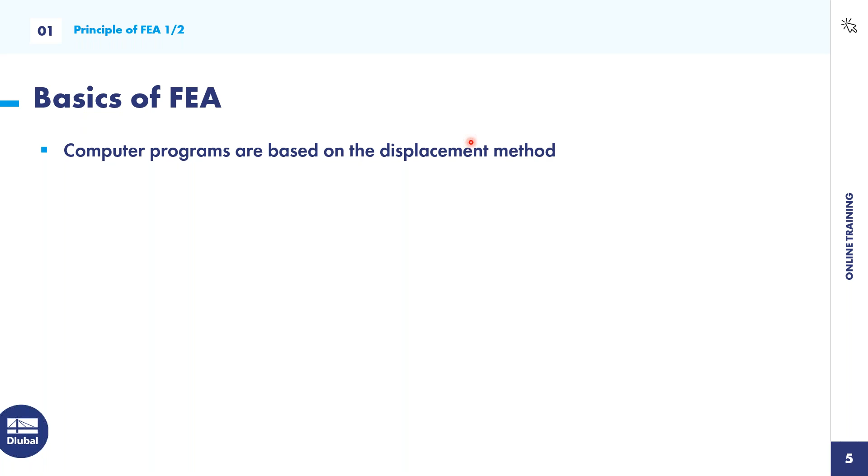Here, the FEA programs work with the displacement method. So the unknown of this equation, of this whole calculation process, is the displacement. You calculate first the displacement vectors, and then you can calculate the internal forces and also the support reactions and so on. This analytical solution of very complex structures is, in reality, really hard to achieve. So when you want to calculate something by hand or with Excel, you reach the limits, because it's very hard to get realistic results.

So you have to use FEA programs, FEA software. What happens there? The real structures are decomposed into a mesh of finite interconnected elements. That's also where the name finite element analysis comes from. The real structure is decomposed into a mesh of finite interconnected elements. We will see this later in the example.

On each node of this FE element, the properties of the element continuum are described. Then the mechanical behavior is described by approximation sets. These approximation sets are the secrets of every software producer, every software creator—it's very complex. And one really important point is the discretization of each structure.

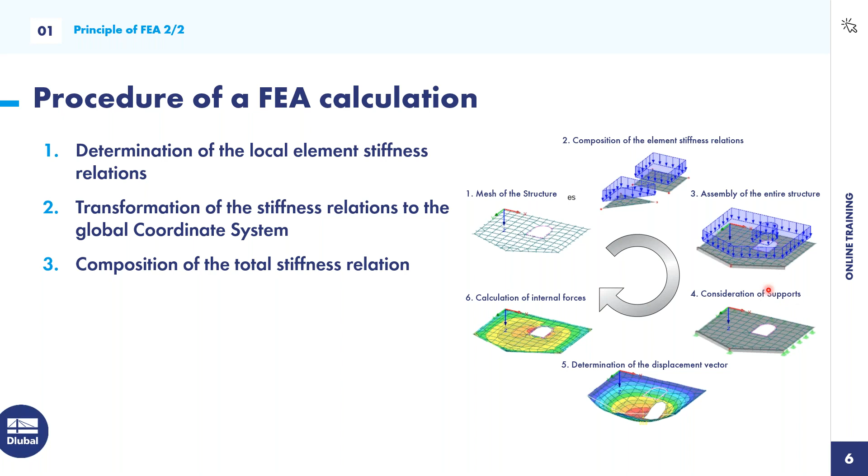Then I also have to consider some boundary conditions like hinges, or in this case the supports. Do I have hinged supports, or fixed supports? Do I have rigid supports, and so on? Then I can determine the displacement vectors, so I solve the equation system, and then I have the possibility to calculate backwards to the internal forces and also to the support forces.

Yeah, and this was the basic procedure of an FEA calculation. And now we are going to do this little example.

So first of all, we are going to model these 3 continuous plates. And then we are going to compare the results of this bending moment with a continuous beam. This will be very interesting, because then we can see the different results.

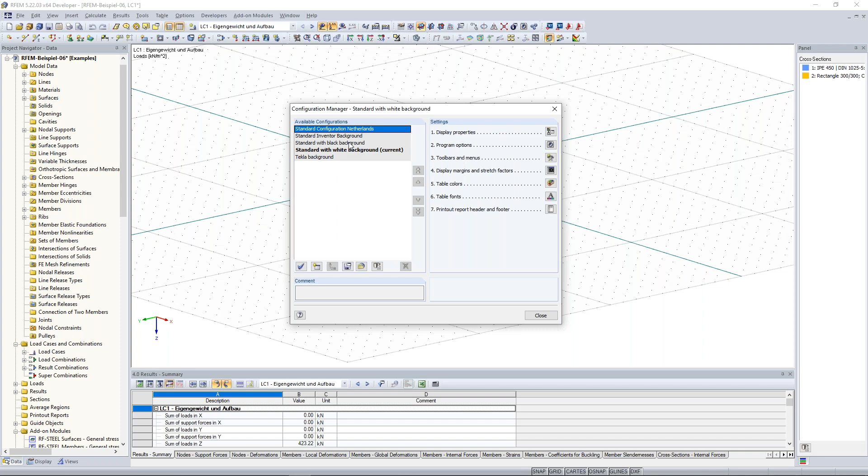So for those wondering why my background is white, here you can change it when you click on options and then the configuration manager. There you can see there is standard with white background, you can change it to the black background. When I click here, standard with black background, double click, and the background changes to black, but I prefer the white background. Double click again, and I have a white background.

It's up to you how to use it. I prefer the white background, but it doesn't matter. They also give you several other options to do something, and also some edit possibilities and so on.

Below this menu bar, you see the symbol bar. With the symbol bar, you have faster and quicker access to the most common used functions. So if you want to create some lines, just click on new line and draw your lines. This is very fast forward, and by double right-clicking, I finish and end this insert.

The same applies with a lot of other functions. So when I want to change my view, I can click here on isometric view and change this view. Also these views: when I want to look against the global Y coordinate, I click here, view in Y coordinate, and I look to this side.

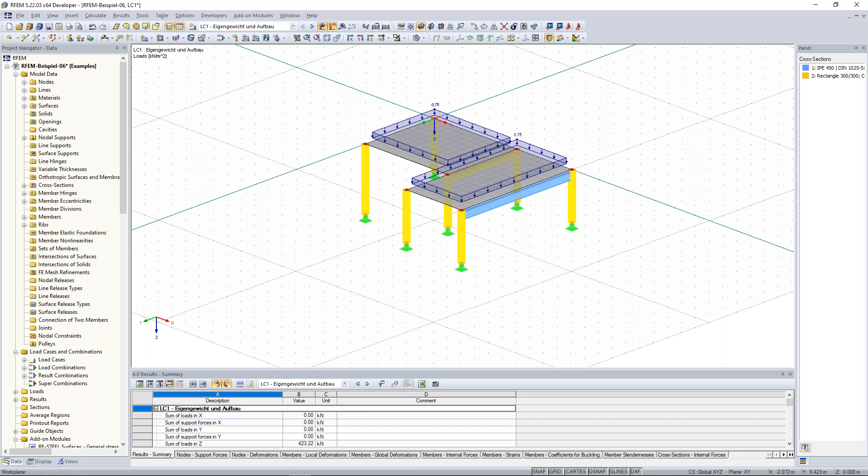When I show the results of this structure, I also have the fourth tab, the results tab. But I want to begin with the data navigator.

With the data navigator, you have all the possibilities to have an overview of data like the nodes. So when I click on one node, the node is selected, and with right click on that, I can find this node - I see this here with the arrow. The same with the surfaces: all surfaces I created before, I can click on them and modify or edit them just by right clicking here.

Also the same with load cases and loads, results, and so on.

At the bottom you will find the add-on modules. Remember, RFEM is good for the calculation of internal forces, deformation, stresses, and so on. But if you want to design something, like a steel column or a concrete downstand beam, you have to use our add-on modules. They will give you the designs for different materials and areas like steel, concrete, timber structures, while RFEM is just for the calculation of deformation and stresses.

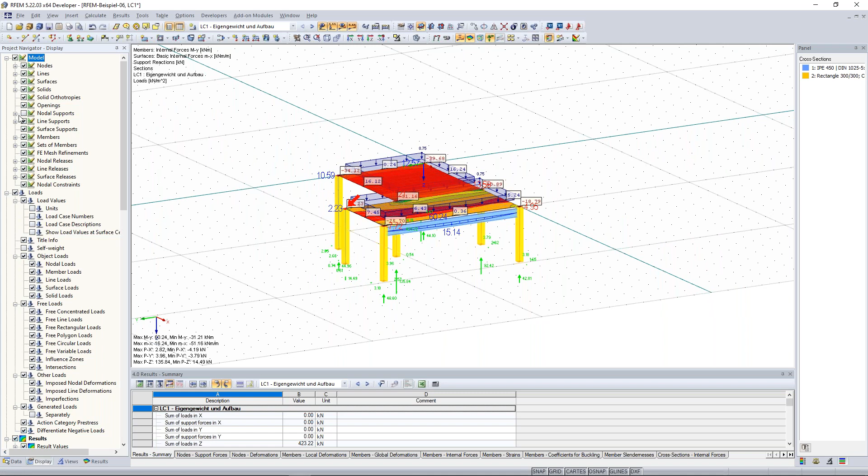The same with the loads: when I don't want to see these surface loads here, I just click on loads and deactivate their view. There are also a lot of other possibilities. Maybe when you want to show the numbering of all objects, just click here in the display navigator, go to the numbering area, and you see the numbering of the objects.

Then I jump to the Views navigator. It's very helpful to work with a lot of views when your model is going to be bigger and more complex. So it may be useful to have some user-defined views. I close and deactivate the result view, and I like this view very much, so I save this view.

I can click here: create new user-defined view. I write 'favorite view'. During my working process, I change some views in order to work better with the program and the model. Then when I want to switch to my favorite view, I just click here in the Views navigator under user-defined views, and you jump to your favorite view.

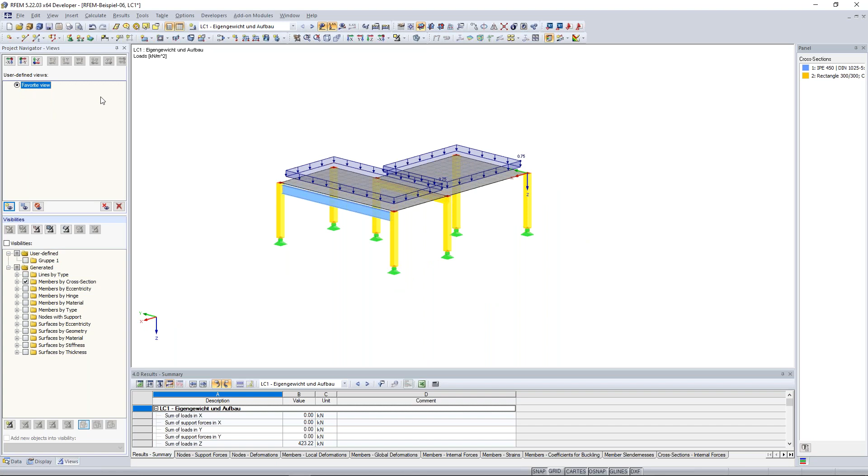The same applies with visibilities. When you want to filter something, to show just the members or the columns, it's very easy to do here with the views. Now I want to show just the columns. I click on members by cross sections, and since I know the cross section of my columns is 300 by 300, I click on the rectangle 300x300, and all columns are shown.

When I want to add maybe this downstand beam, this IPE profile, I click on that. And the same with the surfaces, so I click here, surfaces by thickness. I have two surfaces with a thickness of 20 centimeters. I click on that, and it shows me the surfaces.

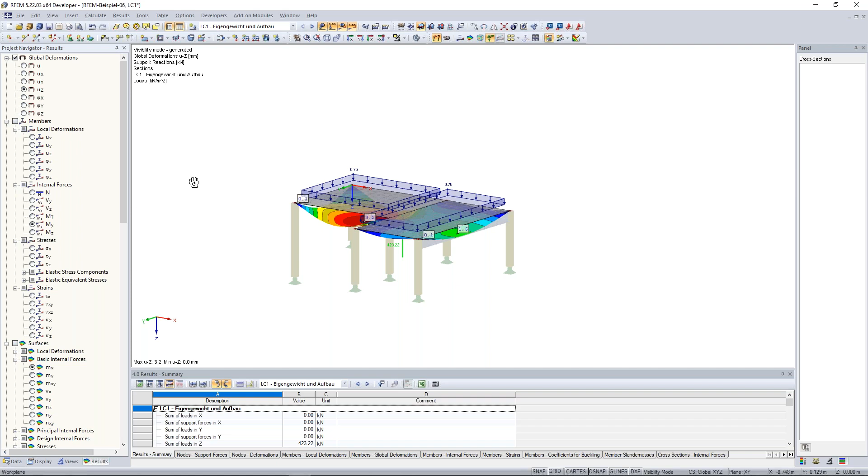Now to the fourth and last tab of the navigator, here I can show the results. First of all, maybe the deformation. I can show the deformation under global deformation, but also some internal forces. So when I cancel the visibility mode that I did before, I can show maybe the bending moment.

I just click here on My, and I see here at the downstand beam we have a nice field moment. Or when I want to see the compression forces with the normal forces at the columns, I see some normal forces and so on. Also the support reactions. Everything concerning showing the results, you can manage here by the results navigator.

Something to the tables: tables act in a similar way to the data navigator. So when you want to create something new, you can do it here just by creating a new node. The same for the lines, surfaces. So you see everything interacts with each other.

You can create a new node here in the table, or create a new node here at the data navigator by right-clicking on node, new node, or just by clicking here in the symbol bar. So there are several ways to do an insert, an edit, or a modification of a model here in RFEM.

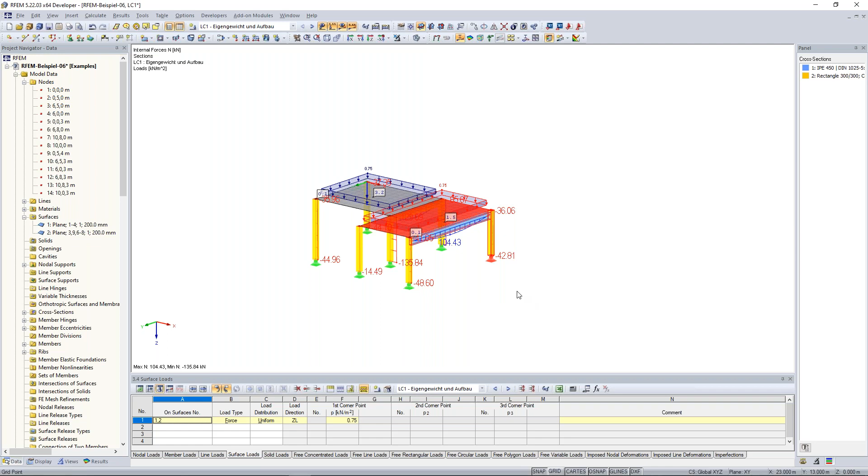Note the difference. With the mouse wheel, you can zoom in and zoom out. This is very important to know. When I press the mouse wheel, I can move my work plane. This is also important to know.

With the right click, I can open this context menu. Just clicking here on the work plane opens this context menu. When I do this on an object, it opens the context menu of that object, in this case the member or the line.

Also, when I want to rotate maybe this building, just press the Control key on your keyboard and then press the mouse wheel, and you can rotate it. The same functions you can do also here in the symbol bar with this icon: move, zoom, and rotate. You have the same possibilities and so on.

Good, so far to that. Now I have prepared some questions for you. Let's start with this one: I want to know from you what is a discretization. We had it before in the PowerPoint presentation.

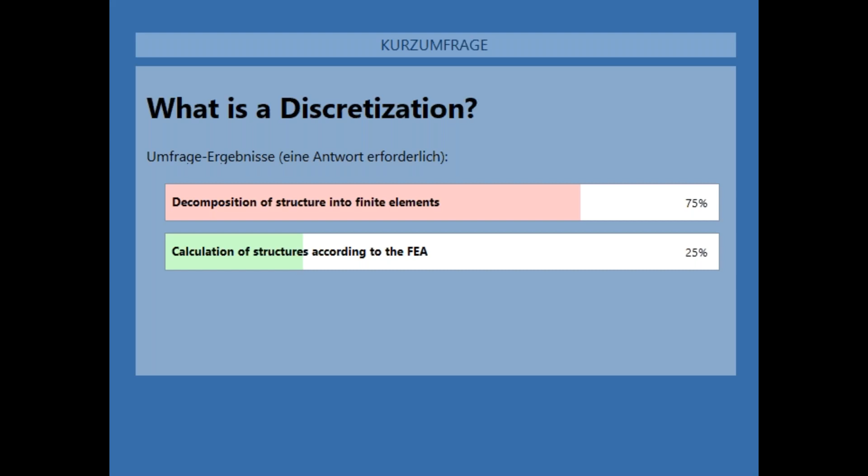Good, and the next question is concerning RFEM. I want to know what is RFEM, what can it do.

I have to take a sip of water.

Good, 90% have voted, so I close this poll window here. I show you the results. RFEM is a 3D FEA program for calculating members, plates, walls, folded plates, shells, solids, and also contact elements. So everything is there. But it's also a 3D structural frame analysis program.

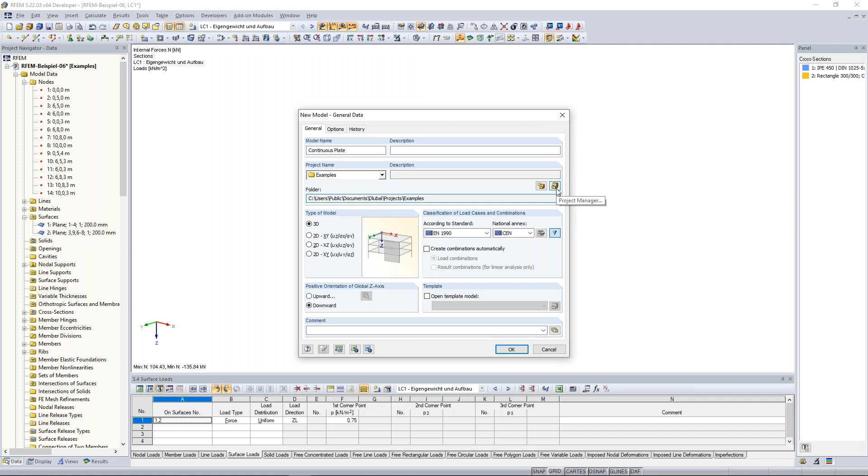After that, it opens this General Data window, and here you can insert the model name. In this case, I give the name Continuous Plate. You can make a short description, it's up to you. I save this to my folder examples. You can create a new folder, a new project, or search for the right folder here at the project manager, it's up to you.

For me it's very important to differentiate this type of models. Here you have the possibility to have different types of models - you can create a 3D model, 2D, and different types of 2D. This 2D type is especially for plates loaded by forces perpendicular to that plane. And this other 2D type is especially for walls or for 2D frames who have parallel loads - these are plates acted on by wind loads, for example, and these wind loads act parallel to the plane.

For our example, it's important to choose this 2D XY, the first one, and we don't need any of these load cases, no classification of load cases in combination, so we don't need any standard. Maybe for real structural engineering work we'd have to choose some standards, but in this case it's not so important. But I want my positive orientation of the global z-axis to be downwards. For structural analysis, it's very common that the global z-axis is downwards because our loads show downwards, and this is also the reason why we have this z-axis downwards.

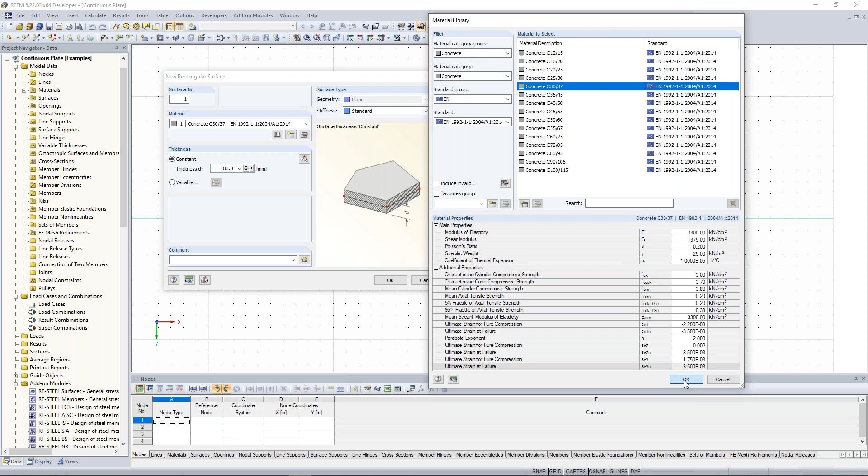The C30/37 concrete has a characteristic cylinder compressive strength of 3 kilonewton per square centimeter, and also a cube compressive strength of 3.7 kilonewton per square centimeter. So that's what this C30/37 means. For those who are not from Europe, just click on OK, and I press again on OK and put there a thickness of 300 millimeters, then I press OK.

Then I click here on this first node, on the global axis point, and then I put this plate 10 meters long. You see it here at the coordinates - now my x coordinate is 10 meters and my y coordinate is -5. I click on that, and by right clicking I end this option to insert something.

Good, now let's see - I see there is one question concerning the units.

Here at the menu tab of options, you have the possibility to change the units and decimal places. This is very interesting for those who are not using Euro units, or who are using imperial units. Just click on units and decimal places, and here you have the possibility to change that. You can change from meter to feet, yards, inches, and so on, and adjust the decimal places, same for loads, results, and so on. But I leave it like that because for me it's clear. For those who want to change the units, just go to options, units and decimal places, and change it like you want.

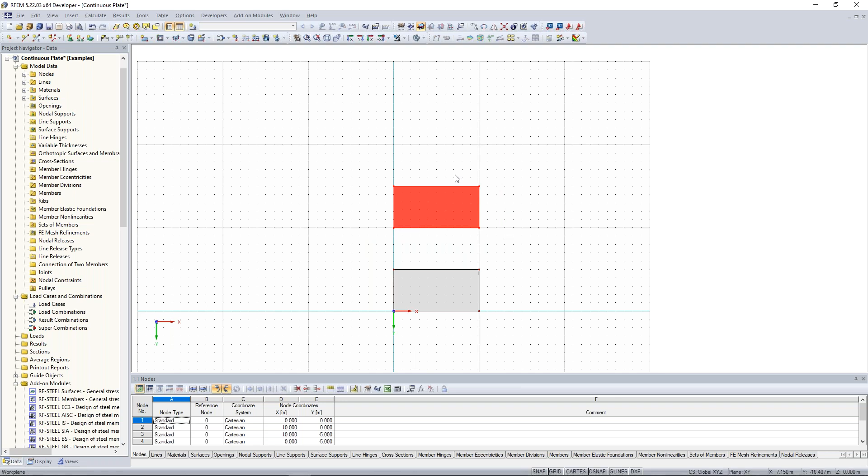Now I want to copy this plate from there to there. So I do a selection window and select the whole plate, including the nodes and the lines. Now the whole surface is selected. By right-clicking, I open the context menu of these objects, because there are now more than one - I have selected the surface, but also the 4 lines and the 4 nodes. I want to copy everything, so I click here on move and copy.

To copy and move this plate, I have to enter at least 1 as the number of copies here. Then I choose the displacement vector, and the displacement vector for me is minus 10 meters, so the displacement is then from there to there. I click on OK, and the whole plate was copied from there to there.

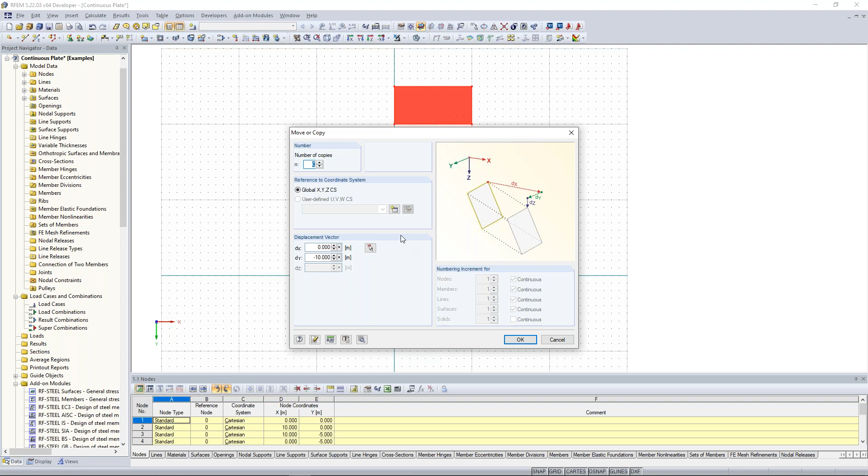Now I want to move this 10 meters downwards. So I select everything again, then right click with move and copy. Now I don't want to create a number of copies, so I set it here to 0. I select my displacement vector, which should be from there to there. I click on OK, and I copied it from there to there.

To have a good comparison to our plate results, I want to create also a beam, a continuous beam. In this case, I have to create a new single member - to create beams, downstand beams, or girders in RFEM, it's always this new single member. So just click on that, and click here to create a new cross section.

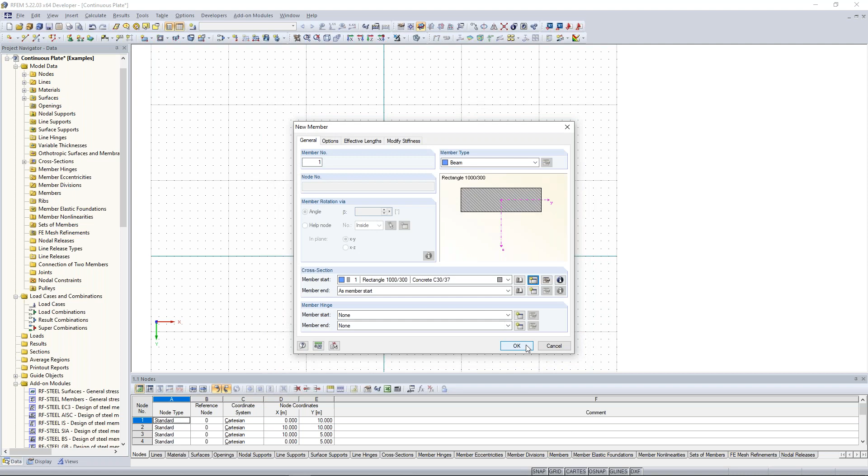I create a new cross section for member start. In order to have a good reference to the plate results, I want to create a rectangular solid cross section. So I click here on the overview of cross sections, to the solid cross section rectangle, and I type my values of a width of 1000 millimeters and a height of 300 millimeters. The material is the same here. I click OK, apply this again with OK, and confirm this also again with OK.

Then I model this continuous beam from that node here to that grid point, and close this insert also with escape or with a right click on the mouse.

Next step is that we divide these lines in order to have lines to create line supports here. I change my view a little bit - we want to create a continuous beam here, so we need an additional node to create our support here, and also additional lines to create our line supports. So I change my view again to the front view, clicking on view in Z direction, looking at this side to have this view. So what can I do? I can divide lines in order to have an additional node.

So I click on the bottom line of this plate, of this surface, right click on that, and then I can divide the line graphically by n intermediate nodes or by distance. In this case it doesn't matter what to use, everything is possible, but I want to show you the different options. So first of all, we do it graphically. In this window you have the division spacing and also the steps for how you divide this. As you go along the line, you see the different numbers, and I want to divide this exactly at the middle of the line, so I need the number 5. I divide this, and now I have an additional node.

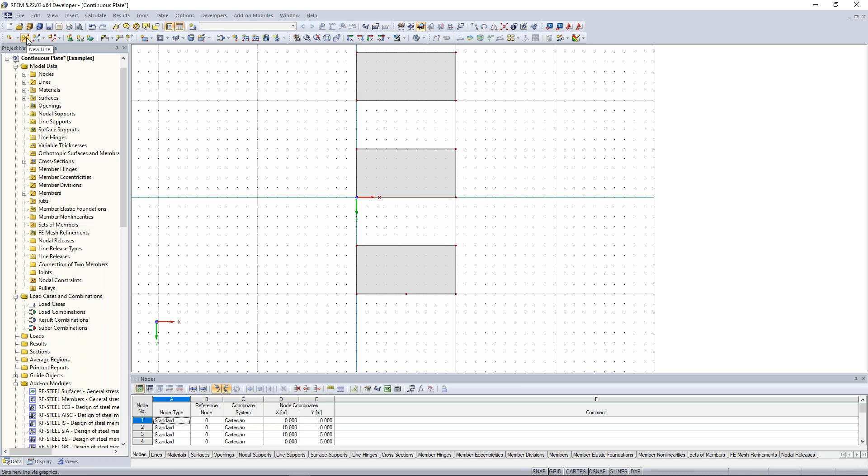And now click here from this node to this node. Good. By double escape clicking or double right clicking, I close this entry.

We do the same again with this line. So right click on that line. I divide the line, but in this case in intermediate nodes.

Now it's very important to know these arrows. These arrows symbolize the orientation of the line. So every line, every member has one node at the beginning and one node at the end, and this arrow shows me the orientation. In this case, this arrow shows from the left side to the right side, meaning the line has at the left side its beginning node, its starting node, and on the right side its ending node.

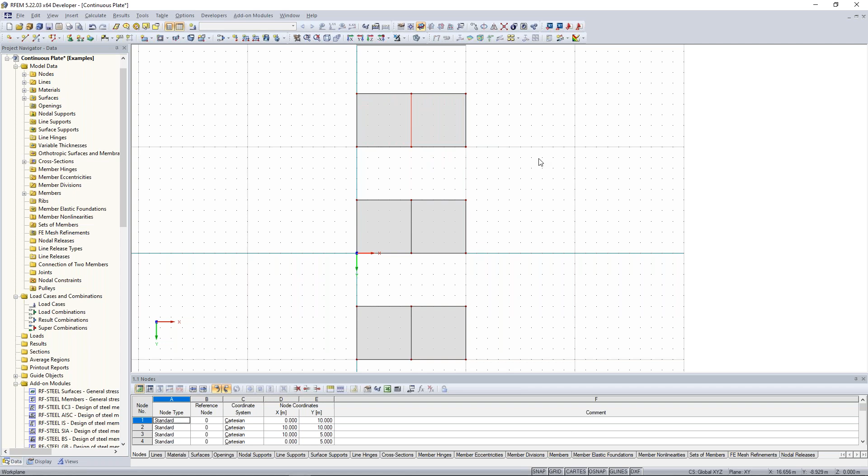Just click on one of these lines, and now with the pressed Ctrl key and the pressed left mouse click, you can easily drag and drop something. And when you want to leave it, just release the left mouse click. So again, let me undo this.

With the keyboard combination, Control key and Z, I can undo some things, and I want to do this drag and drop function again. So left click on this line, then press the Control key and also the left mouse click, and release it here. This is a very important workflow and function of RFEM.

Good. Now we want to divide this beam also. So I click here on this beam, right click on divide member. Keep it in mind, a member is also a beam or a column or something like that.

Now I want to divide it by distance. Now I have again this orientation of this beam, the same as before. On the left side, I have the beginning node, and on the right side, I have the ending node, because my arrow shows from left to right. And I want to have the division here at 5 meters. I click OK, and that was it.

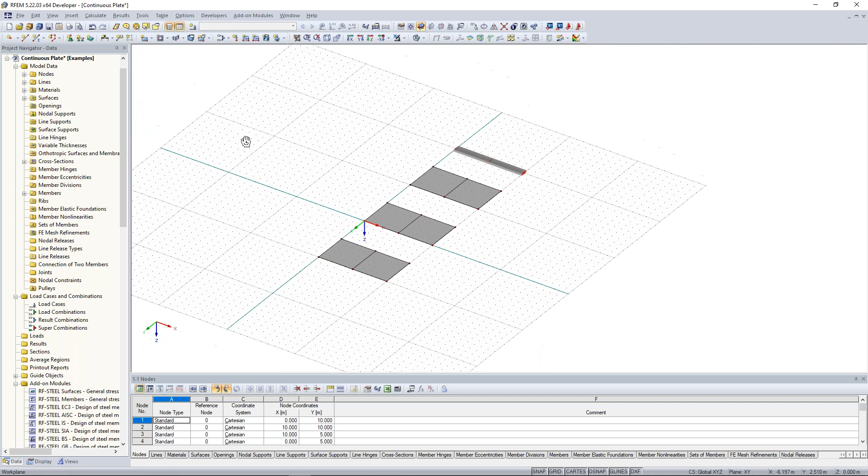Good. Now I want to create the nodal supports and the line supports. First of all, the line supports, because we want to have here a continuous plate of these surfaces. So we need new line supports.

Just click here in the symbol bar, new line support, and we choose this hinged support, because when we are going to watch these supports, we can create a new type of line support here.

We see, okay, the UZ, so the support in UZ is activated. What does it mean? So when I activate some of these things here, restraints and supports, I block the deformation, I block the displacement or the restraints. So I want my support to carry vertical forces, so I have to block the displacement in the Z direction, and this is also the reason why there are going to be vertical forces. I press OK.

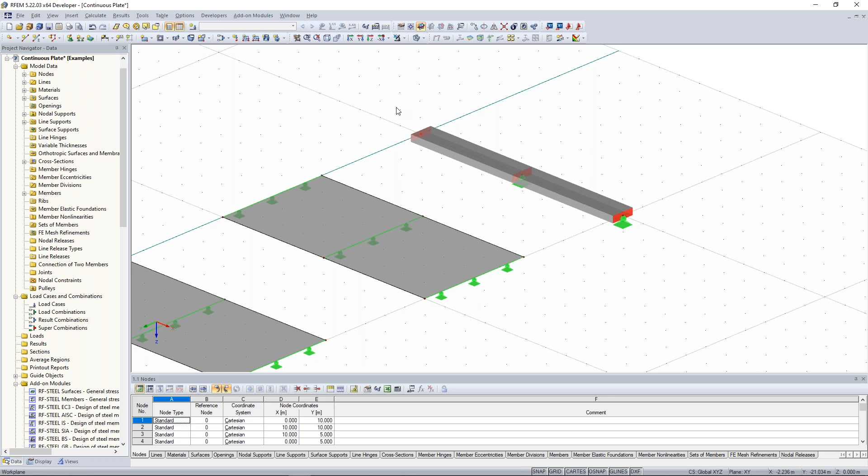And for that point, for that node, we need a different nodal support, because at the moment it can be possible that the beam has torsion, and that it can rotate along its own axis, and this is something we don't want to have. So I have to create a different nodal support.

So here again, new nodal support. I click here on create new type of nodal support, and I have to activate this phi x, in order to block the rotation about its own axis. Yeah, this is very important. Click on OK, again on OK, and we have this.

Good. So much to the modeling of supports and plates.

Now we are going to put the loads. One important point: in order to add the loads, it's important to first have your load case, because every load is referred to a load case. So in this case, we have to create our new load case first. Here at the symbol bar, just click on new load case.

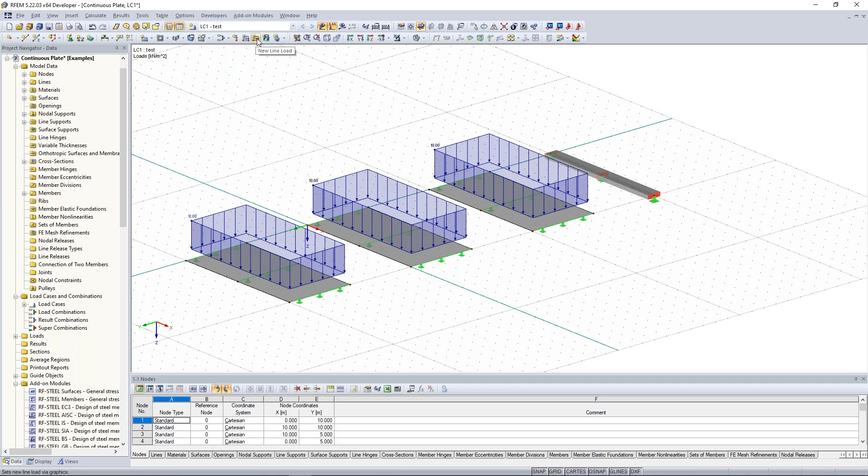Good. Now I have to create it also for the beam, for the member. Keep that in mind: we have in RFEM two possibilities of line or distributed loads, first the member load and the line load. Because we have here a member, it's very important to really use the member load for that. The line load is for lines of a surface, like wind loads on edges. So when you want to put loads on edges of surfaces, plates, or shells, you have to use line loads. But if you have members with cross sections and so on, you have to use member loads. So keep that in mind, please.

I click here on new member load, put here also the same load parameter, 10 kilonewton per meter, and click OK. Good, so far for the insert of loads.

Praxitelis, I see some questions. Yes, should we answer something? Should we do something again? We had several questions about the stiffness and the type of the plates. Maybe you could explain it in a minute. For example, could you explain about the stiffness type of plate?

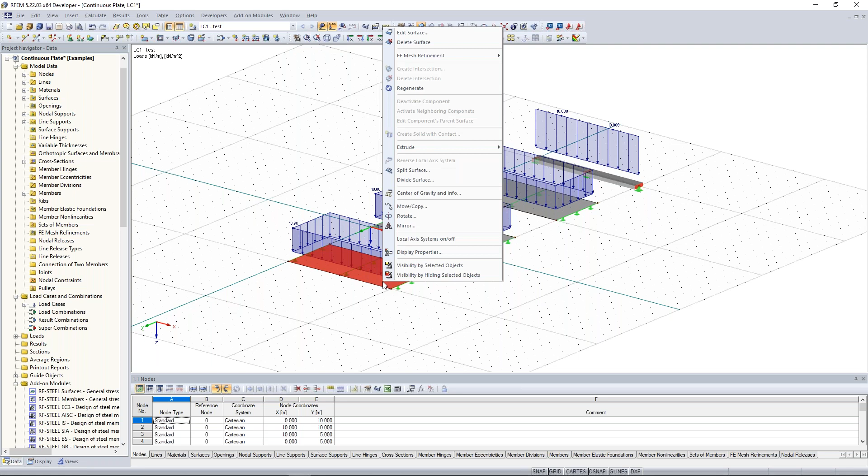Okay, of course. We have different stiffness types of plates. When I right click on one of these surfaces here and click on edit surface, you see here on the right side the surface type. First of all, the geometry. In this case, we have a plane. So a plane is really when you have something in one plane.

And the stiffness, we have here different stiffness types. First of all, we also have the possibility to have an orthotropic stiffness. So here at the bitmap, you can see different types of that. And when you click on the right icon here, you can edit the parameters of stiffness, and then you also see the stiffness matrix, and you can modify that. There are so many possibilities to do that.

So when you want to have the constant thickness or some effective thicknesses, you can modify these stiffness elements. And then you see it also in the material properties, and here at the stiffness matrix. This is what I told before at the beginning of our PowerPoint presentation: at each node, this different type of stiffness matrix is what we consider for the calculation. So when you want to modify that, you can do it your own way. That's possible.

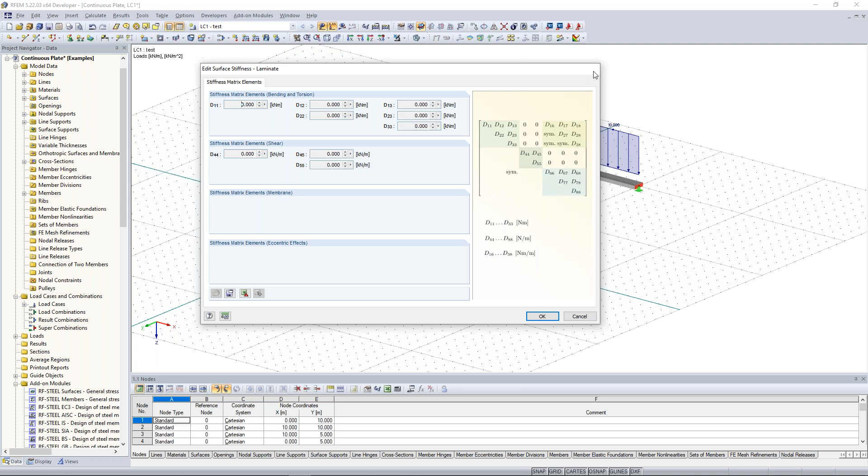And you can also do it rigid, so without deformation, infinite stiffness. But in this case, we leave it at standard. Good, another question?

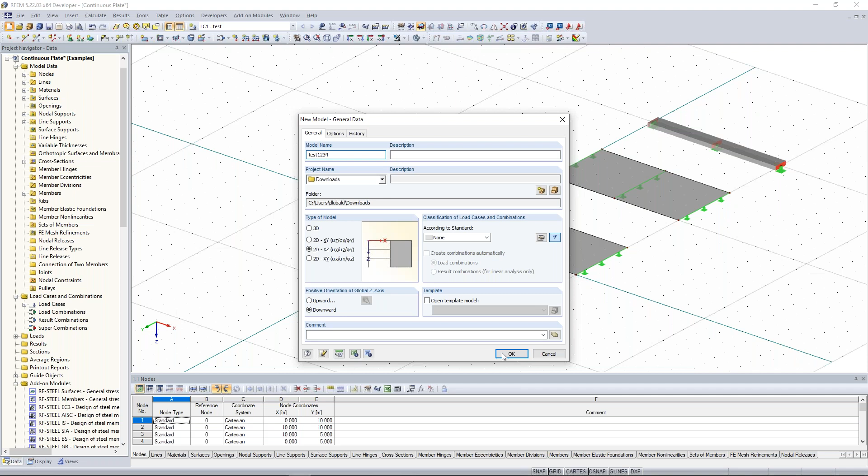So look, I create two lines. I create two lines, and they are acting independent from each other. So this line is for itself alone and this line is for itself alone. When I want them to have one point here, one node, so that they are acting with each other, I can create an additional node here at the symbol bar by connect lines or members.

I draw one selection window and here a new node was created. And now you can also see this line is acting with this line. This is very important because when you want to calculate members, you have members and you don't want them to act on each other.

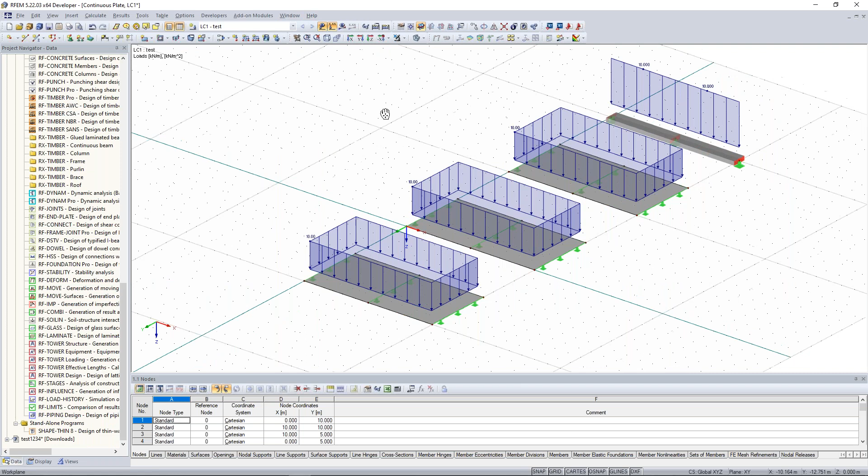Okay, good. Now I jump back to the continuous plate. We have inserted the loads. Now let's do the different FE mesh refinements, because I want to have a different FE mesh refinement at each plate. I want the FE mesh size to be 1 meter, 0.5 meter and 0.1 meter, because I want to show you the different results depending on the different FE mesh refinements and sizes - this is a very important point to know.

So first of all, just click here on the surface. By right-clicking on that surface, you can do an FE mesh refinement. Click here on new, and here you have the possibility to create a new FE mesh refinement. Because we do this FE mesh refinement at the surface, the surface is just selected, so we apply it to the surface and put here a length of 1 meter. Just click OK and click OK again. You see here this square - it symbolizes that here we have an FE mesh refinement of 1 by 1 meter.

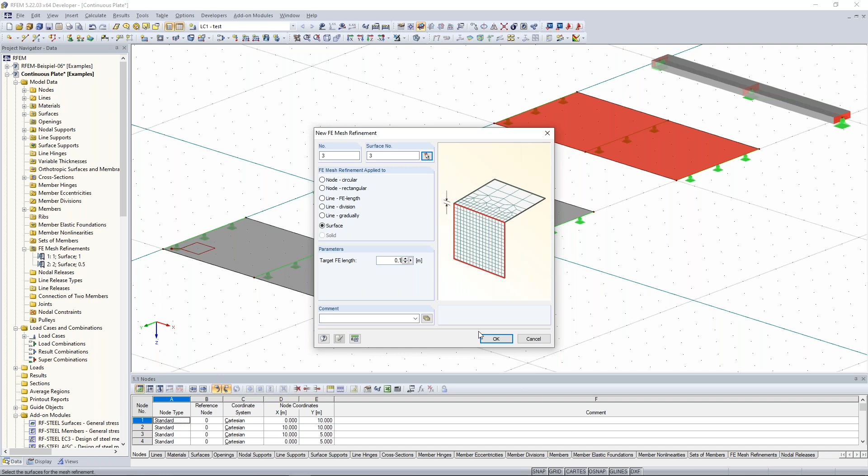I also told you that you can do the same creation of model objects with the help of the data navigator. I want to do that, so I jump to the data navigator, go to the area of FE mesh refinements, and when I open this structure I see the already created different FE mesh refinements. I want to create a new one. I click here with right click to new FE mesh refinement, and I refer first to a surface - I click this surface, the third surface, and then a target FE length of 0.1 meter.

In order to see the results better, it's good to have a comparison of the internal forces of that beam and also of the internal forces of the plates. So in order to handle this better, we have to create sections.

Also here at the data navigator, I can create sections very easily by right click on section - you find it here. Just create a new section, give it a name, and set the different points of sections. I refer just to one surface, so here on surface number 1.

And the edge points of my sections are the middle lines of the outer lines of this plane here. Okay.

The section on surface, the projection direction is in global Z. I press OK, and I make this again for the next surfaces. So again, here on sections, create a new section.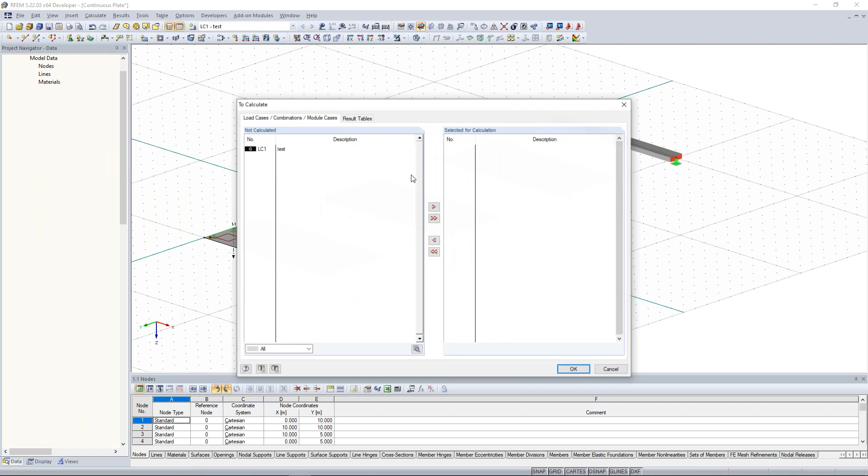Good. Now everything is ready for the calculation. So we can calculate it, and this is what we are going to do now. Just click here on the menu bar, calculate, and you can calculate everything, or when you have different load cases and when you want to show one special load case, you can click here on calculate, and then choose this load case here, or just click in the symbol bar, calculate all.

So I click here in the symbol bar, calculate all. And the program is calculating, and this is what you are going to see now. Good.

So first of all, you see the global deformation. But this is something that's not so interesting. You can watch maybe the deformation in some way, but more interesting are the internal forces of the member here, and also the internal forces of the plates.

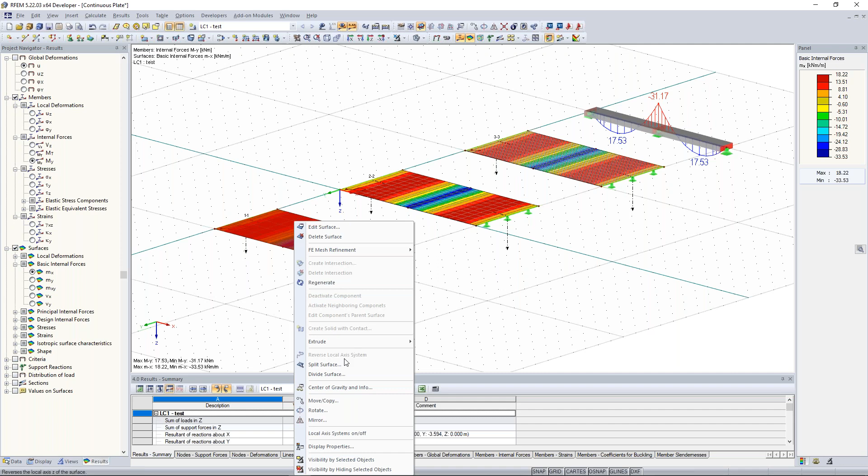So I activate it. I click here on surfaces. Now I see the basic internal forces mx. Mx means every surface has a local axis system. By right clicking, I can show the local axis system of the surface. So right click on the surface here at local axis system on off, I can show the local system.

And the basic internal force mx tells me that these bending moments, these internal forces, are along the local x-axis. Yeah, and this is, I think, very clear because we have here field moments, here negative moments, like here at the beam. So in order to see the results better, I activate the sections.

Now I see the different results. Good. Now you can maybe see also the different results of the sections, and also the different sizes of the FE mesh, because here we have 1 meter, so at every 1 meter there is a result, and here 0.5 meter and here 0.1 meter.

And what I want to show you is that it depends which FE sizes you have, because it can cause different results. Good.

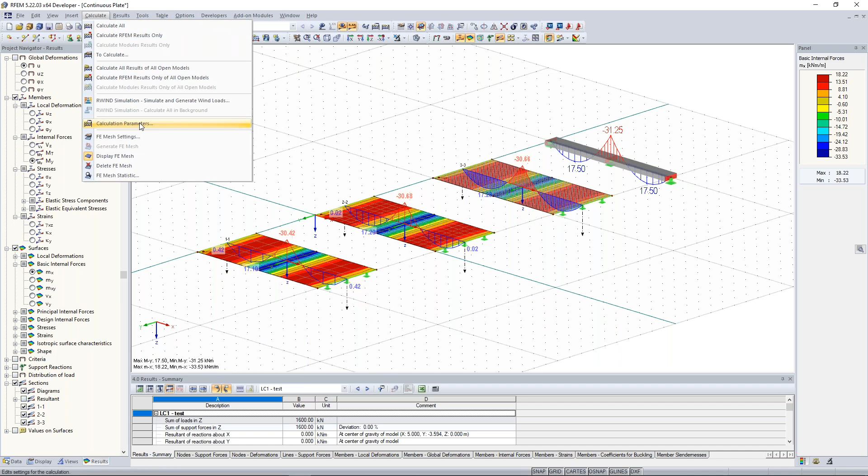Please keep that in mind. Please consider that here in the calculation parameters you have to deactivate or activate the shear stiffness of members. Yeah? Good.

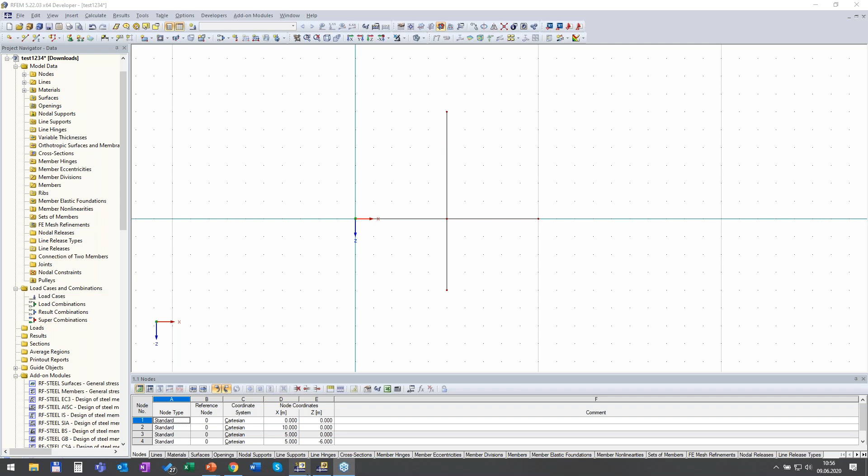Someone is asking, could you talk about connection in the nodes when 3 members are connected? Sometimes RFEM warns about instability. I understand, okay, I think this can happen when you have maybe hinges. I'll explain it to you with this example.

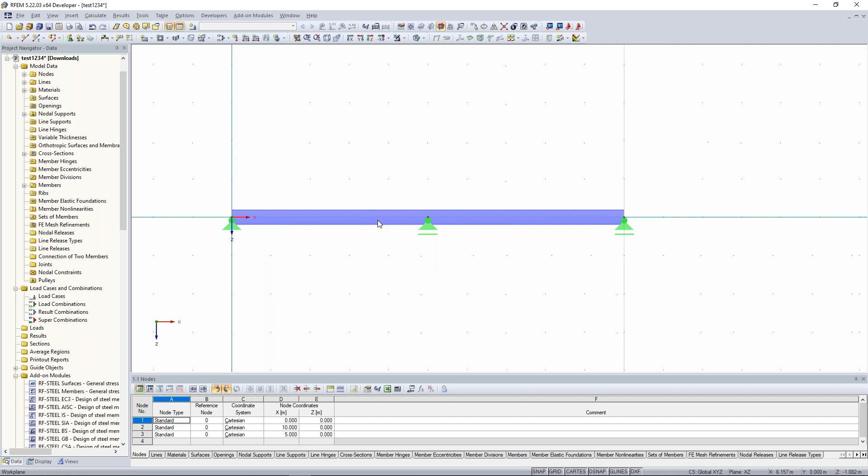I create now very fast some cross sections, some IPE profiles. Okay, so look, here we have this thing, very small, I make it a little bit bigger. Good. So I make one continuous beam, and I divide it again here, maybe a little bit by distance, so here in the middle. And I also make some sliding supports, nodal supports. And now I want to have here a hinge, so I have to divide it again. I create here a hinge.

So in this case, in RFEM, we have to create member hinges. I go to this beam here, edit member, and I create a member hinge, normal moment hinge. So in this case, I set the rotational release MY, and I create here a hinge. So now the whole beam is statically determined.

And when you would have here an additional hinge, like here again, so I make this here, then it would be unstable, because you have here a hinge chain, since we have 2 hinges, and then it would be unstable. So keep that in mind when you have 2 parts of members, it's okay to have just one hinge, in order to consider the zero moment here. Two hinges would cause a hinge chain.

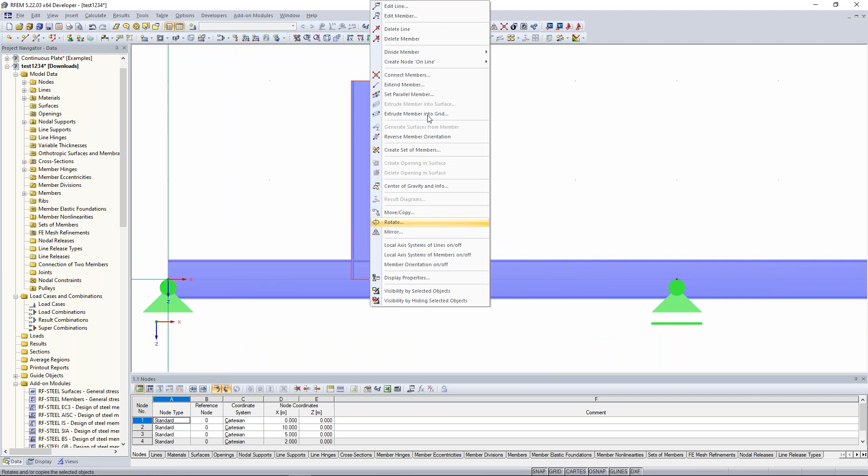And when you have 3 members, so I model one member again, and when you want to have here also a hinged joint, just click on the upper member, create here a new hinge, and then you have the hinged joint. But if you would do an additional joint, an additional hinge at this beam here, then you would have again a hinge chain. So the same amount of hinges as the amount of members would cause a hinge chain. I hope that the question was answered.

Due to the hinges, exactly. So you have to consider it in the right way. And also, when you create hinges at the nodal supports, this is also false. This is not correct, because the nodal supports at the end or at the beginning there are hinges. Keep that in mind.

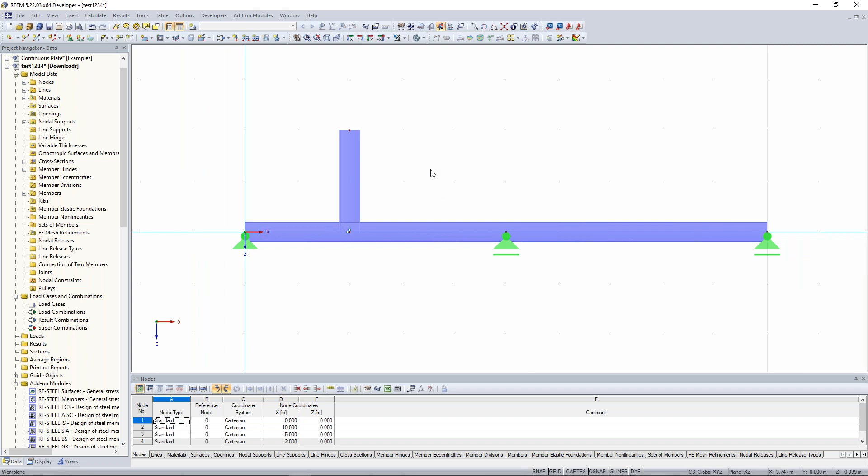Good. Then I would say let's move forward. Praxitelis, some additional things, or maybe? I think we can carry on. Okay, good.

Okay, so much to the continuous plate in comparison to the beam. Now I have prepared a test for you. So what happens if the shear stiffness is activated?

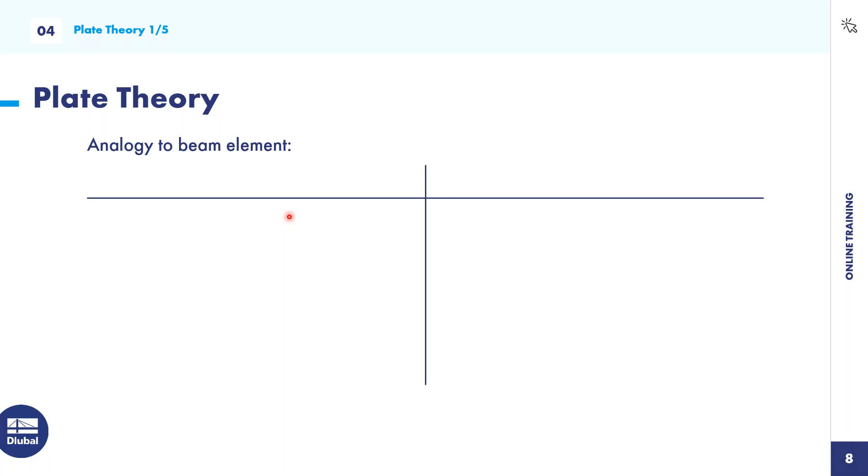Now, again, to the little bit theoretical part. I jump back to my PowerPoint. And now I want to tell you something about the plate theory, very important in my opinion. I don't know how you learned this in your studies, but I learned it this way. So we have two theories of beam calculations. On the one side we have the Bernoulli beam, and on the other side we have the Timoshenko beam.

So what does the Bernoulli beam say to me? In this case, the cross sections remain in plane, and also the cross sections remain perpendicular to the member axis. These are the assumptions of Bernoulli.

And what's very important, like I said before with the shear stiffness and so on, Bernoulli doesn't consider shear deformations. So we have rigid shear stiffness. That's also the reason why, in my opinion, what you learn first in your studies, when you calculate beams and girders and so on, you don't consider the shear deformations at first, because a lot of books say to use some general formula in order to calculate these continuous beams a little bit faster. And that's also the reason why we don't consider that.

And on the other side, we have the Timoshenko beam. The Timoshenko beam assumes at first the same positions: the cross section remains in plane, and the cross sections remain perpendicular to the member axis. But Timoshenko considers the shear deformations. So the shear stiffness is limited, it's not endless, it isn't rigid.

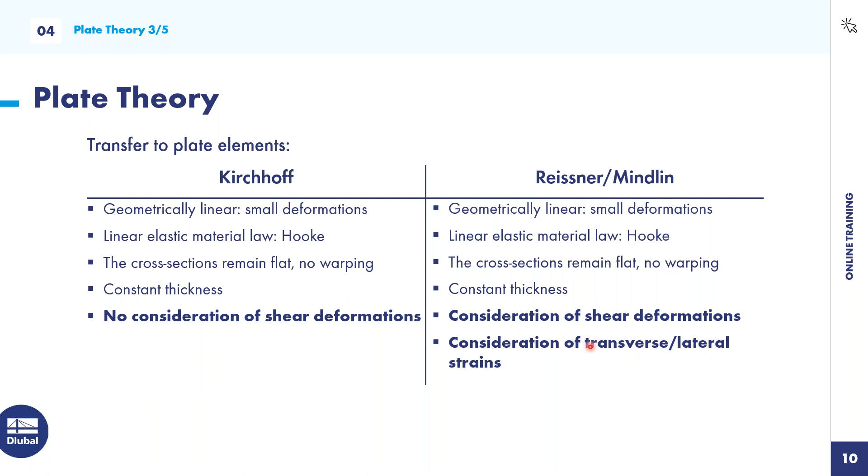Okay, good. To summarize it, I have on the left side Kirchhoff, and on the right side Reissner/Mindlin. To say it again, we have no consideration of shear deformations at Kirchhoff, and consideration of shear deformations at Reissner/Mindlin. So how do we use this in practice?

Kirchhoff supports good results when I have thin plates, so really normal slabs in concrete calculations of buildings, so 20 up to 30 centimeters, there the results are okay. But you have to consider that these are just pure bending load bearing capacities.

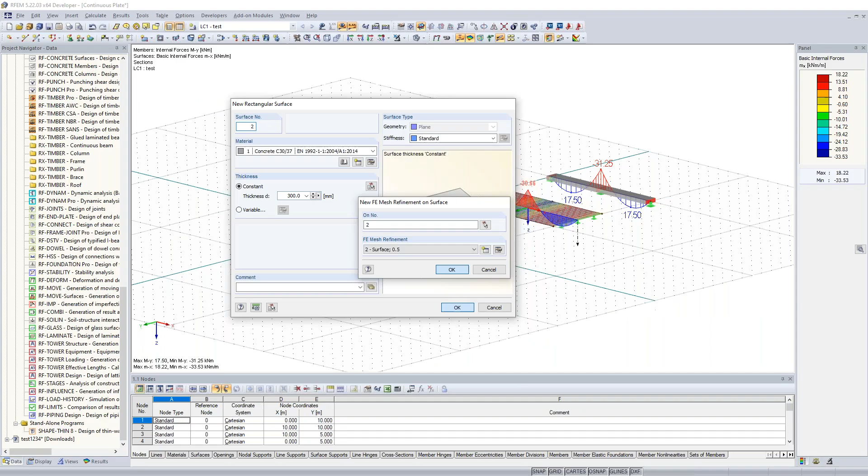Okay, good. Now I'll show you also in the program. When I jump here to the model again, and go to calculate and to the calculation parameters, I have here the possibility to choose one of these plate bending theories. In this case, the standard of RFEM is always Mindlin.

So maybe you remember these results here. I changed to the Kirchhoff method, to the Kirchhoff theory, and calculate everything again. You see maybe the different results of the internal forces here, of the bending moments. Yeah, they're a little bit different, so keep that in mind.

If I would make this surface bigger, so with a greater thickness of this plate, the results would be more different. Okay, good. So much for the plate theory.

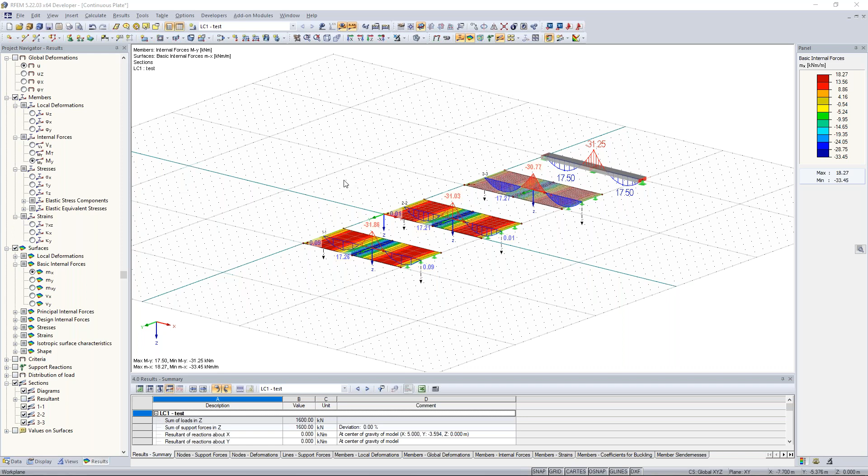And maybe you see it here again. You have here 3 different plates with 3 different FE mesh sizes, and you see the difference between those results are not so big. So to calculate with a greater FE mesh could be maybe a good approximation to the exact result of this beam here. So it's up to you how to discretize, how to do your FE mesh sizes.

Okay, what are the 4 different things? I mean, what is the difference in the 4 things? So here in the surfaces we create. Okay, I tell you the difference.

So the difference is that we create 3 different types of FE mesh sizes, so of FE mesh refinements, and I wanted to show you the different results in comparison to this beam result here, to this member result here, because when you calculate beams and members, the results are mostly exact, because it's easier to handle, to consider that in the stiffness matrix.

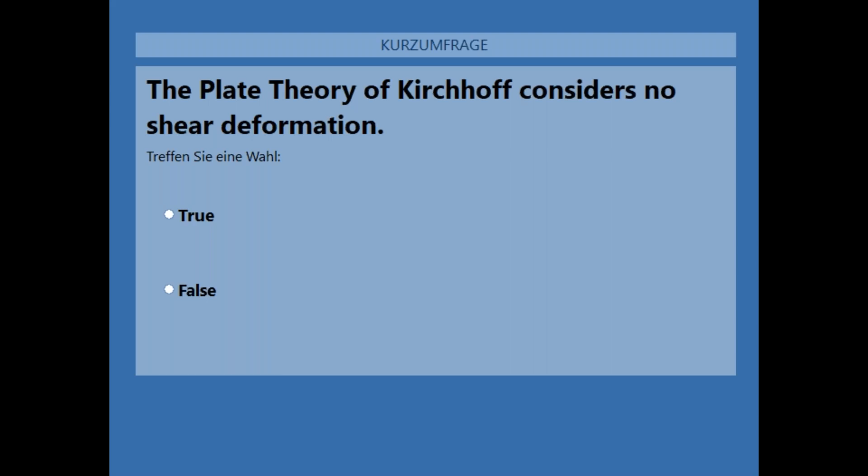Good, let's wait maybe 10 seconds more. I close this poll window and show you the results. 77% of you have chosen the right answer, so yes, the plate theory of Kirchhoff considers no shear deformation. That's right, good.

Now I jump back to my PowerPoint presentation. We are going to do this Euler case 1, so we look at the stability analysis of this clamped column, and then also this frame here.

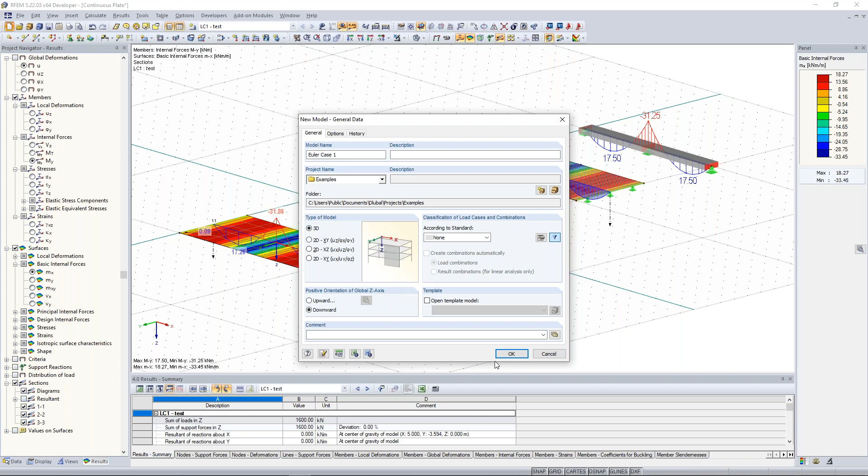So I create a new model. I enter the name Euler case 1, and now it's very important to have a type of model in 3D, because we want to look at both sides of buckling, both eigenforms in both directions, and this is why I do that here.

So again, I want to create one member. Keep in mind, in RFEM it's also possible to create members and beams, columns, and so on. I click here on New Single Member, then on Create New Cross-Section for Member Start, and choose this HEB profile. For those who can see, just click here on Import Cross-Section from Library, and here you have a lot of different cross-sections.

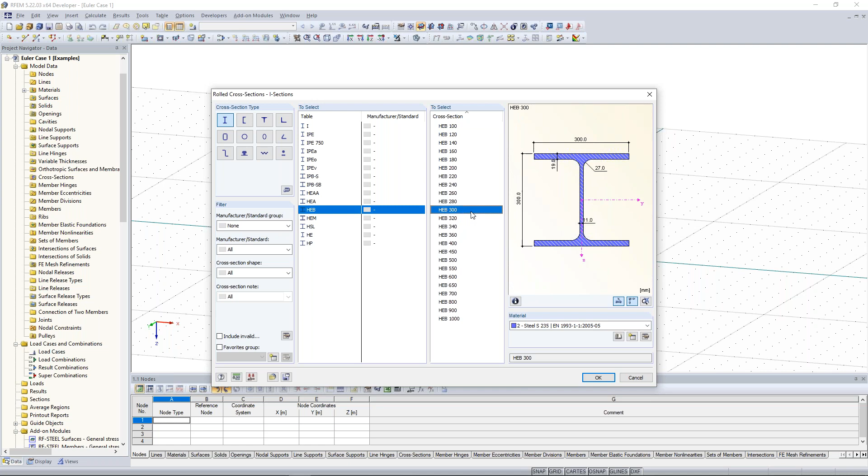I choose here the I sections. Now you have the possibility to choose the right manufacturer and maybe different cross-section shapes, but I leave it as normal. I choose the HEB — in Europe it's very usual, this profile. I choose this HEB 300 profile, click OK, then click OK again, and apply this again with OK.

Now, keep in mind, when you use the model type 3D, you will have different work planes. In this case, I have the work plane X, Y, and I can just model in this work plane. So when I want to create some beams, it's not possible to do that into the height.

So I delete this again. There are two possibilities to do that. First, to change the work plane so I can model my beam upwards — then I have this beam here. Or, when I delete this again and leave this work plane, I have the possibility to create my member perpendicular to the work plane, and in this case it should be 10 meters high, so I put a value of 10 meters.

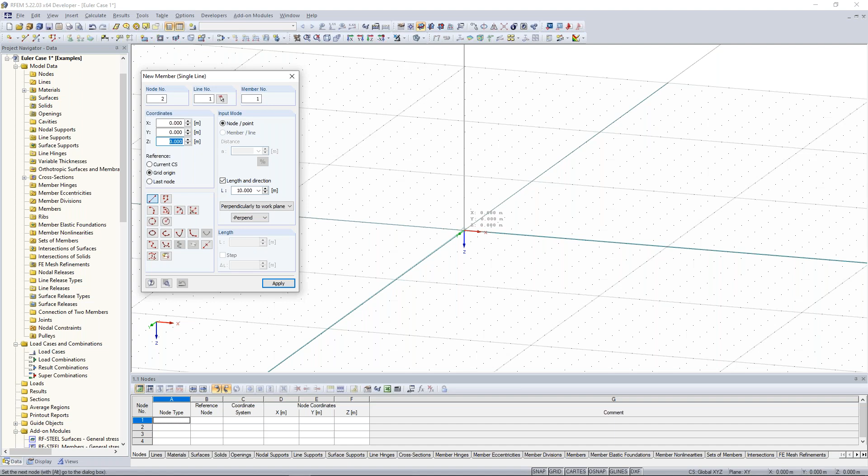You see the member here, the column, but in the wrong direction. I want to have it in this direction, and I put it like that, and now I have my beam here.

Good, now the next step is to put in some supports. I want this as a clamped node here, clamped bearing, so I create a new nodal support. First I select this node here, then click on New Nodal Support, and then say rigid, so every deformation and every restraint is considered. Click OK — this is my Euler column number 1.

Then I need additional node loads, so I have to create first a new load case. To do that, I click here on the symbol bar on New Load Case and click on test. It doesn't matter what the description of this load case is, but I deactivate the self-weight because I just want to have clear internal forces. Click OK.

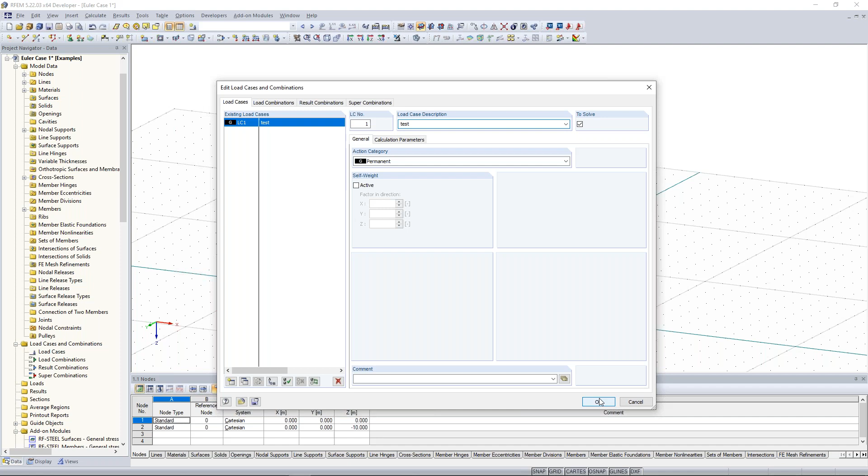Then I create this new nodal load, and now I want to have a compression force of 100 kilonewton and also a horizontal load of 20 kilonewton. Here you can refer to the directions of the nodal loads, with the help of this bitmap and also with the help of this global coordinate system. Click OK. Select this node here and you see the different nodal loads.

So now I want to show you a really important thing. I changed my view a little bit, so in the reverse Y direction, and I calculate now. I click here on Calculate All.

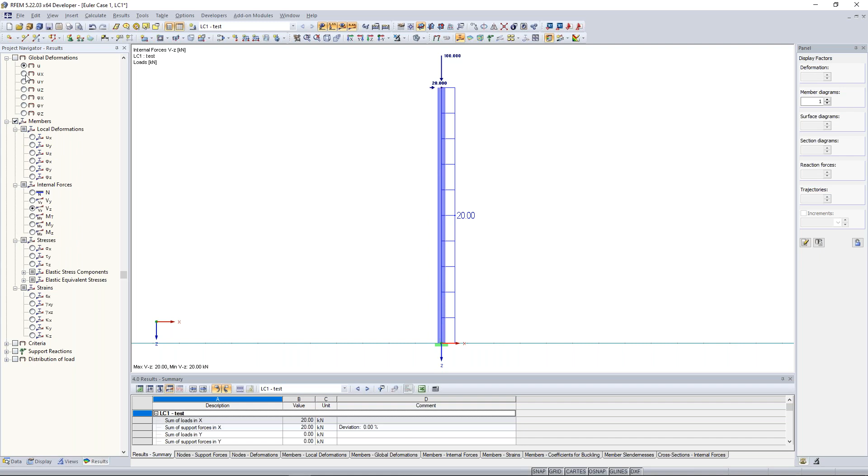And now you can see here the different internal forces. Of course the bending moment is minus 200 kilonewton meter. Also the compression force of 100 and the shear forces. But when you look to the deformation in the global X direction, it's 127 millimeters.

Now I want to show you one important thing: the calculation after the first order theory, and the calculation after the second order, or P delta. So I open the load cases and combinations, and I want to show you the differences concerning these two methods of analysis. Generally the load cases are analyzed by a geometrical linear analysis, but load combinations are calculated by the second order analysis, maybe you know that also under the name P delta. I want to show you the differences between these two methods.

The second order analysis, when I choose that and calculate, it will make the equilibrium equation of a deformed system. First of all, we had the first order, the geometrical linear analysis. There we make the equilibrium of the whole structure at the undeformed system. The first order says we make the equilibrium of an undeformed system, and the second order, or the P delta, says that we make this calculation on a deformed system. Sorry for that confusion.

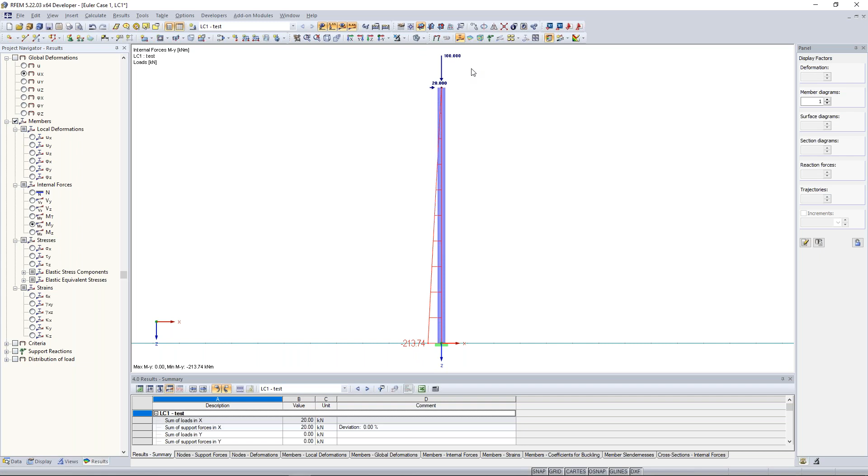Okay, now look to the deformation in the horizontal X direction. This is 137 millimeters. And now look to the bending moment — there we get an additional bending moment of 13 kilonewton meters. Where do these additional 13 kilonewton meters come from? This is due to the calculation of the second order, or the P delta method, because this 100 kilonewton multiplied by the horizontal deformation of 137 millimeters equals the delta of 13 kilonewton meter, plus this normal bending moment of 20 kilonewton meter multiplied by the length, giving the whole bending moment of 213.74 kilonewton meters. So keep that in mind, that you get different results when considering two different methods of analysis.

For those who are asking if you're doing a column or beam: in RFEM there are members, and members can be beams, columns, and girders, it doesn't matter. But the loads, how they react on one of these members, tells you whether it's a column or a beam. In this case, we have a column because we have normal compression forces, which normally indicates a column.

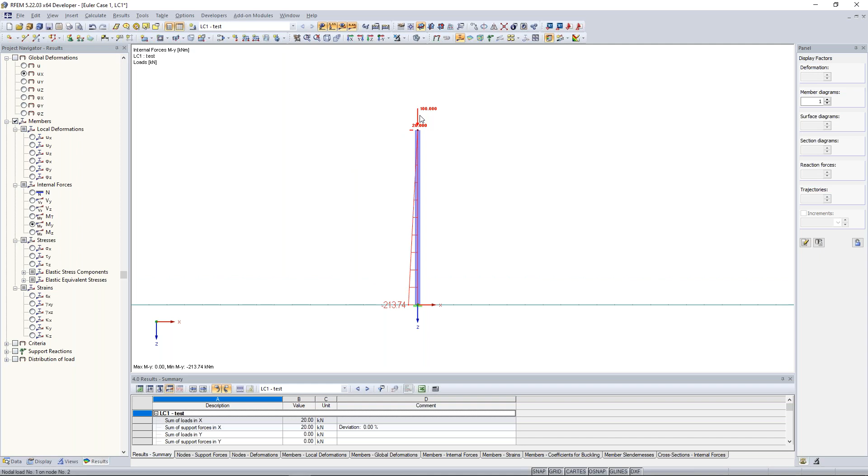Good. Now I want to go ahead to show you the stability analysis. I change this nodal load — I leave just the normal compression force of 100 kilonewton and delete this horizontal force. And I activate here on the left side, at the add-on module, the RF-Stability. For you students, when you use the student version, you have access to all add-on modules of our software. So I open this here.

Now it opens a new window. What does RF-Stability do? The stability analysis calculates, with the help of the eigenvalue method, the different eigenforms and also the different eigenvalues. You know, maybe, Euler — Euler was a mathematician who calculated different cases and determined the critical load factor, the critical load, and the critical lengths. This is something RF-Stability does in a similar way.

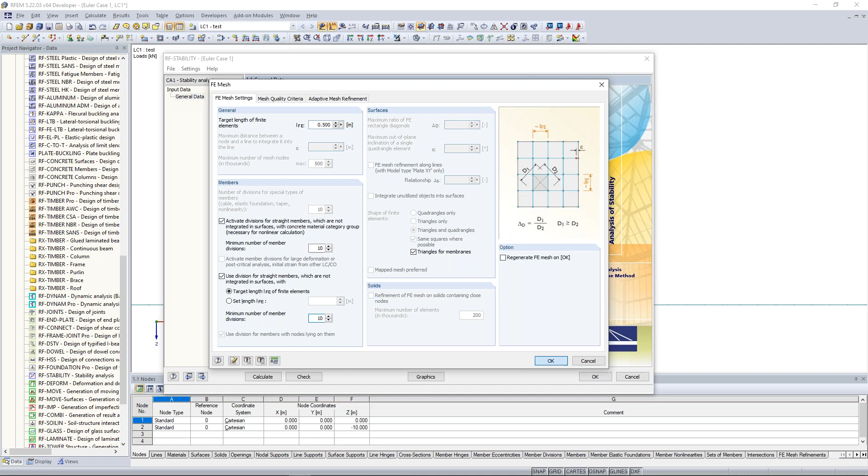Let's calculate this. We get a critical load factor and a magnification factor. The critical load factor is the factor you have to multiply the load by in order to get an unstable system of your model. So when I multiply this factor of 4.4 with 100 kilonewton, I get a nodal load of 440 kilonewton, and my system is going to be unstable. There will be an error in the calculation of RFEM because the system is unstable.

When I consider this method in the theory of second order, or the P-delta method, I have here also my effective length. So here is the critical load, composed of this critical load factor. So if my column or my member gets a normal force of more than 443 kilonewton, the system will become unstable. So we do that.

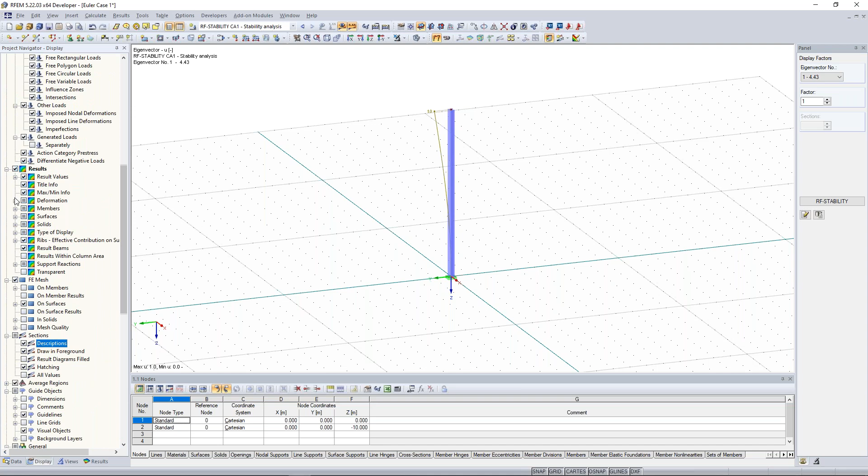Now I want to show you the different eigenvectors, the eigenform a little bit better. So I go to the display navigator, click on deformation, members, and show the cross-section colored. Now you see the first buckling case, the first buckling form of this column. When we zoom in a little bit, I think that's very clear. We have our Euler case 1, so the buckling form, the eigenform, looks a little bit like that.

The first case when this system becomes unstable is that the column buckles around his weak axis. When I show the local axis of this member, I see here this y-axis, and here this z-axis, and the local x-axis. The weak cross-section property, the weak moment of inertia of this column, is around his weak axis, so around his local z-axis. This is also the reason why the column buckles first of all around his weak axis, around his z-axis.

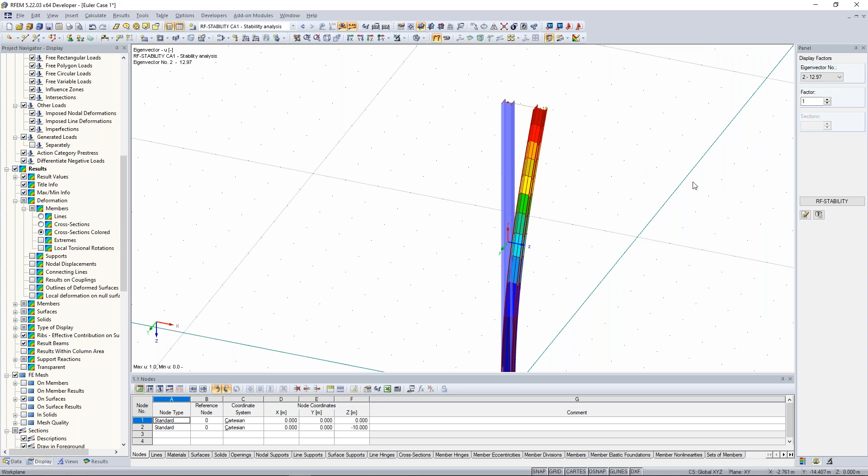Let's jump again back to the area of stability, and let's look again at the effective lengths. You see the effective length factor here is 2, and here 2.006. When you wonder why isn't it exactly 2, Euler said the effective length factor is 2, so we multiply the first length of this column by this factor to get the effective length, the critical length. So why isn't it exactly 2? This is because we considered the shear deformations.

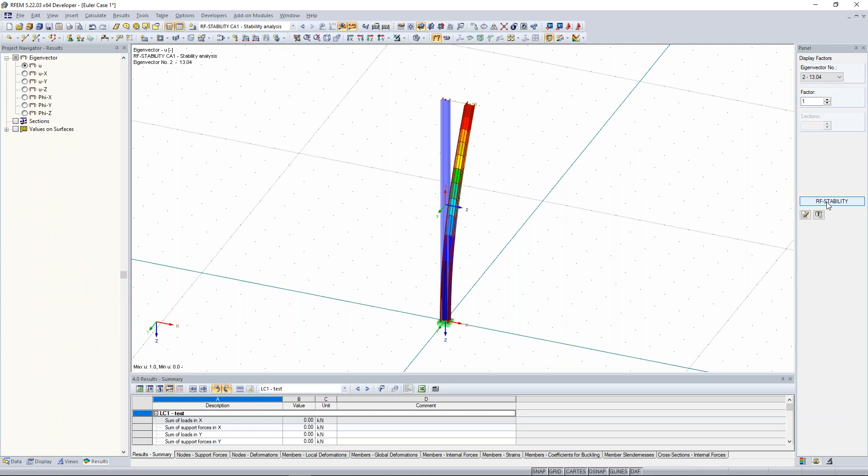So the shear stiffness. When I go back to these options, to this calculation parameters, and I don't consider the shear stiffness of members, and calculate everything again, I get the exact effective length factors. So I jump back to this area of stability, and you see the effective length factor is 2, and also the effective length. Good, so much for the stability analysis of the Euler case 1.

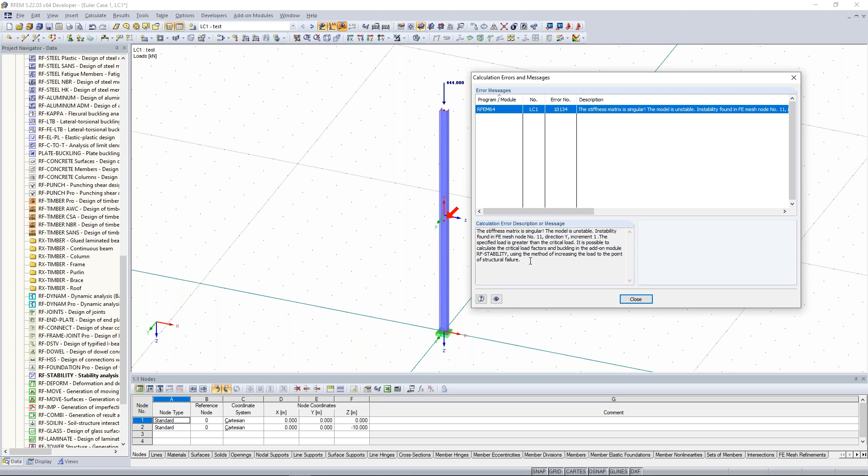Now I want to show you what happens when you get a critical load of more than 443. We have here this nodal load of 100 kilonewton, and when I put there a value of 444 kilonewton, and calculate it with the P-delta method, considering the second order analysis, you will see that my system will be unstable. I calculate it, and you get this error, this calculation error, with the description that the stiffness matrix is singular, the model is unstable, and so on. Because we have a normal force of more than 443 kilonewton, because our nodal load is higher than the critical load.

And this is one thing I give you as a hint. Please consider that. Okay, good.

Praxitelis, are there some questions? Yeah, there are some questions indeed.

Someone is asking about torsion, lateral torsional buckling in the section. Yeah, of course, you can consider it with this program. You can calculate torsion too, but in this case, we don't have any torsion—though the program does consider torsion. That's clear, yeah, of course.

Because we have also our load at the... I don't know, Praxitelis, do you know the English word for Schubmittelpunkt? Torsion middle point, maybe, I have to look it up. Shear, don't know. Shear center. Yeah.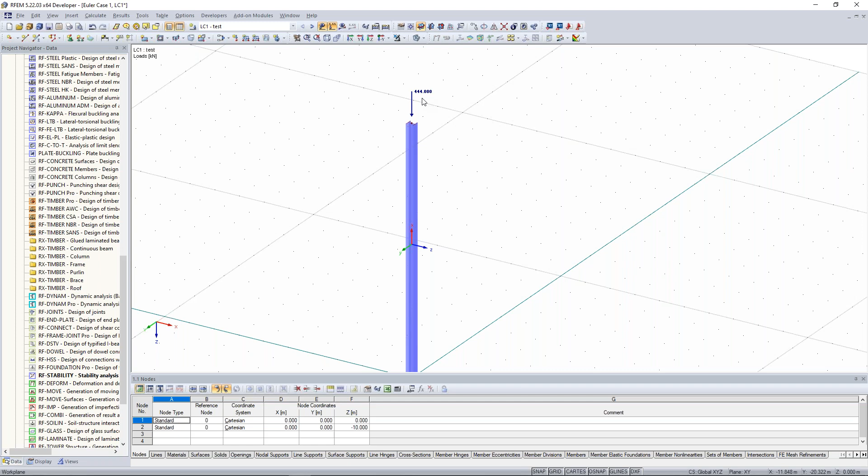So because the loads, if I have some nodal load like here, it acts on the center of gravity or inflection point of the cross section. This is also the reason why we don't have any torsion. So normally, in RFEM, the loads are acting on the center of gravity or inflection points of these cross sections.

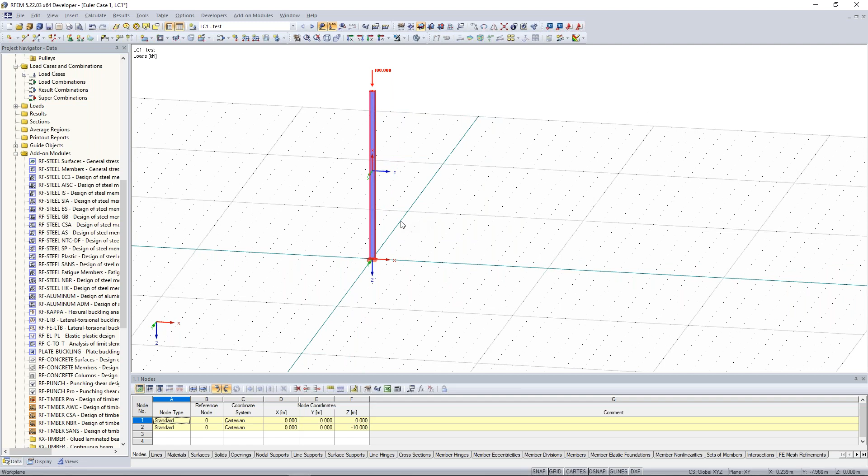So let's go ahead with the frame, there we do the same. I change here maybe the nodal force from 444 to 100. And I copy this column here with the help of my favorite function, pair drag and drop. So with pressed Ctrl key and pressed left mouse, I copy it from there to there, 10 meters along the x-axis. Now I have two columns here, but I want to change the height of these columns.

So to change maybe the coordinate of the nodes, it's very easy to do that. Just select these nodes, then per right click on node, you can edit the coordinate of the z. I put it to 6 meters because I want to have this column 6 meters high. So change it here and automatically the program will set the height of these columns to 6 meters.

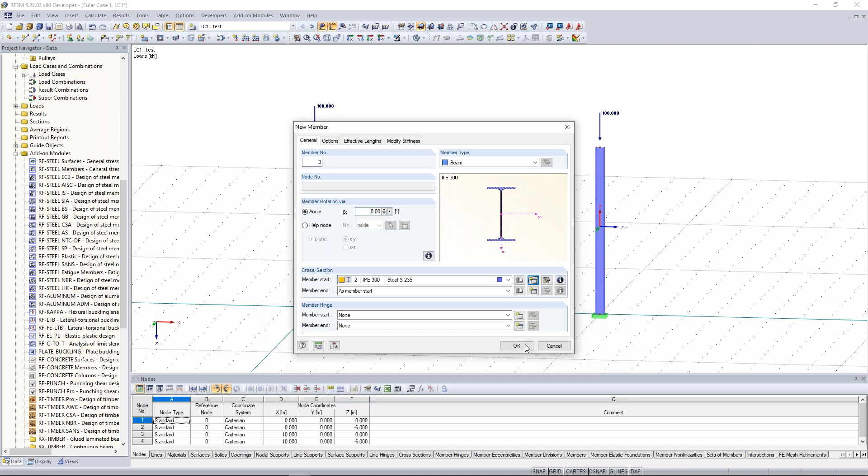Then I want to create a girder here from the left to the right column. So again, I create a new single member. I create a new cross section, in this case an IPE profile, should be a height of 300 millimeters. Click OK. Then I create this beam from the left to the right, and I have my girder here.

Good, then I make the same thing. I calculate everything, and then we watch together first of all the internal forces, and then the critical load factors.

Good, so first of all we are going to watch the normal forces. I think they are clear. So in both columns, you get a normal compression force of 100 kilonewton. Bending moments, we don't have any bending moments. I think this is also clear, because we don't have any horizontal forces and also no shear forces.

When I want to see the nodal supports, I can watch it here by clicking support reactions. I see the vertical forces of the supports. Yeah, good, but this is something not so interesting, because I think that's clear.

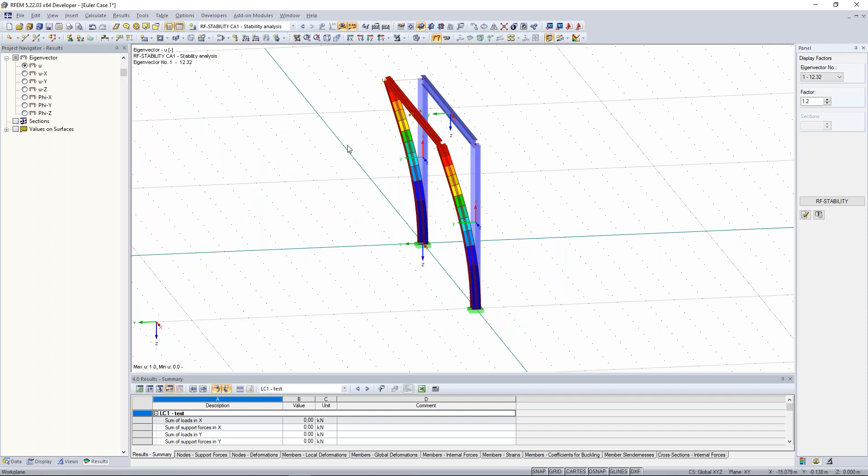And the second also out of the plane, and we have here the critical load factor of 12. So this means we have to multiply this 100 kilonewton by 12 so that our system becomes unstable.

But in reality, when you have cases like this, it's not so good because you have a form that buckles out of this plane. In reality, you have supports that would hold this whole thing in order not to have this buckling form out of the plane. And when you look at a whole 3D structure, you have additional beams along that side.

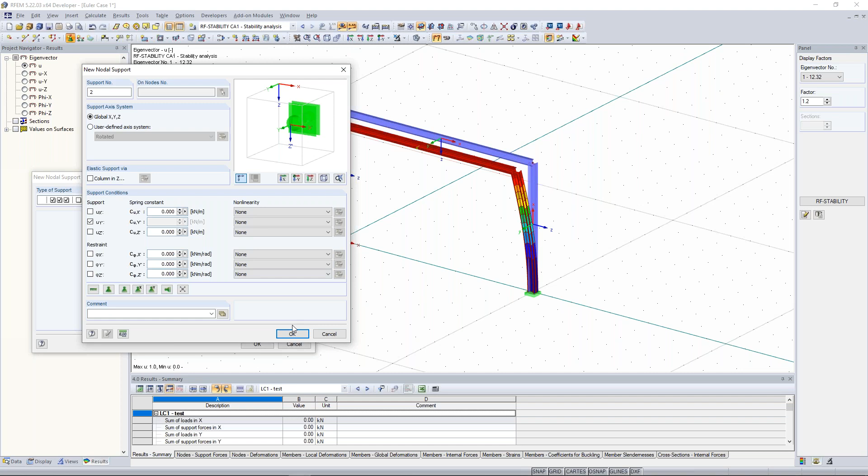So then you wouldn't have this eigenform. Maybe in order to consider that, you can add additional nodal support. So when I put it here, a new nodal support, I want to block the deformation at these nodes out of the plane. I have to create a new nodal support and activate the displacement u-Y, and then the displacement will be blocked in this direction, and forces could happen. So I choose here the nodes, and now watch, our new buckling cases are new eigenforms.

And now our first eigenvector is this one, that we have a buckling in this plane. And this is also what we know from the structural analysis, from the study, because we calculate or consider it in a plane. So much to the frame.

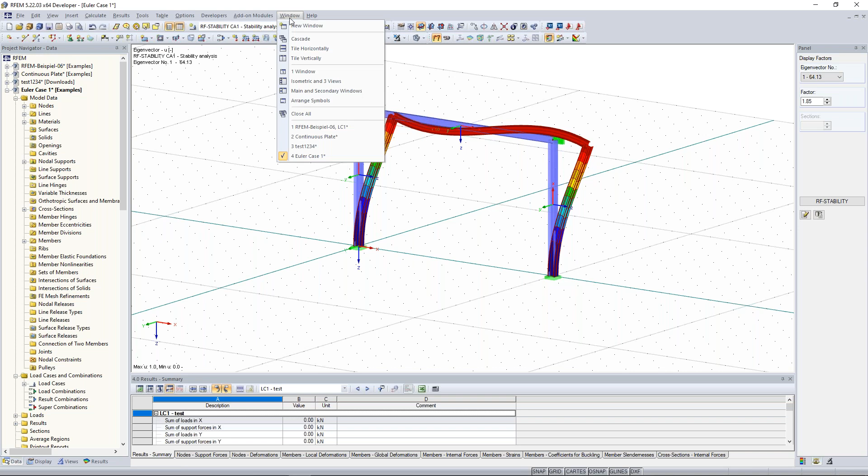Can you throw more light on imperfections considered during second order analysis? Of course. So look, we have this buckling form here, this eigenvector form, and now you want to bring along this displacement form imperfections. This is possible. Use the add-on module RF-IMP, and there you can generate your imperfections due to these forms we calculated in the stability analysis, and then you can calculate it and bring in these imperfections. Use this RF-IMP generation of imperfections, you find it here also at the add-on modules. This is possible.

Okay, we got a question about wind loads. With the wind loads, there are different possibilities. First possibility, to make it very simple, you can add horizontal member loads. So just click here on new member load, choose the right direction, and put here maybe a value of 5 kilonewton per meter, and then put here your line loads, your member loads.

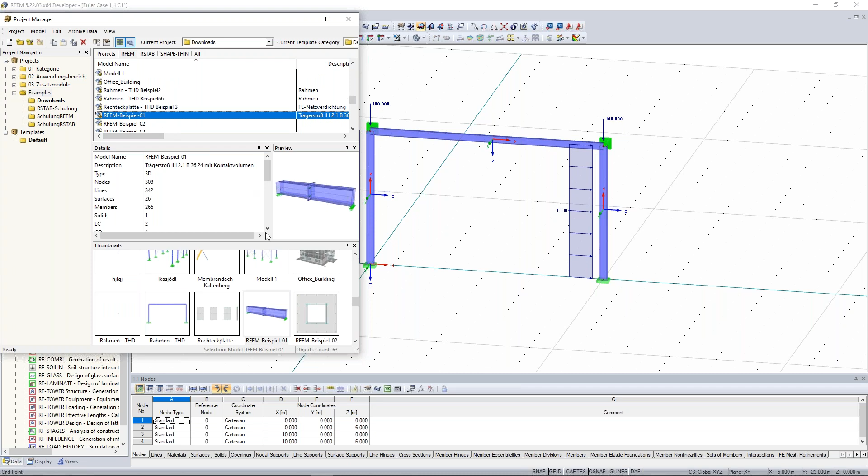This is maybe a very easy wind load, but when you have a more complex 3D hall, something like that, I'll show it to you. Maybe I'll open a new program where we have maybe a hall. I hope we have somewhere a hall. No, we don't have any hall. Here we have a hall.

And maybe you mean also the wind generator. It's very easy to do that. Here, with the help of the tools, we have the possibility to generate loads very easily. We can say wind loads, and then say okay, vertical walls or flat roof, something like that. In this case, we have the vertical wall with roof. Then choose the right standard; in this case, I choose the Eurocode. And then with the help of this bitmap on the right side, you can easily pick up your base geometry.

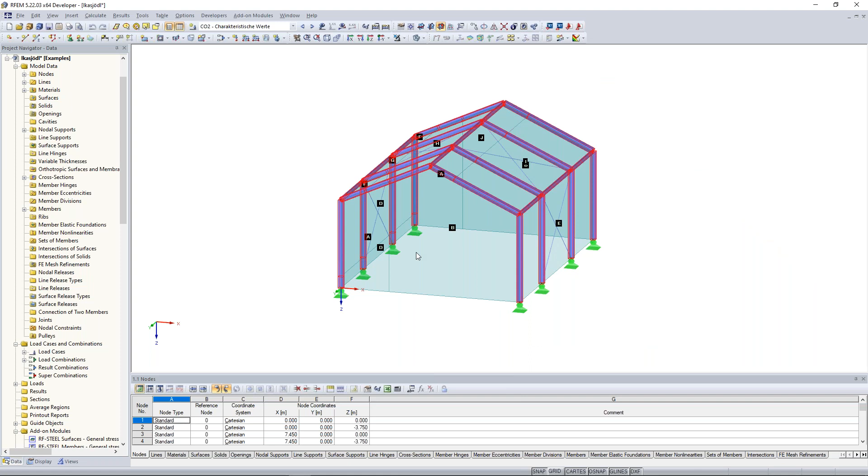So I do that. I click here for this base geometry, and then also my roof type and geometry. So I go from there to there to there, and then I have to choose the right load case, and then I can set the wind on which side. In this case, I want to have this on that side. I can set the height of the structure, also the wind zone, terrain category, and so on. Then I say okay, and I have the different wind pressures and so on. I can show it separately like that.

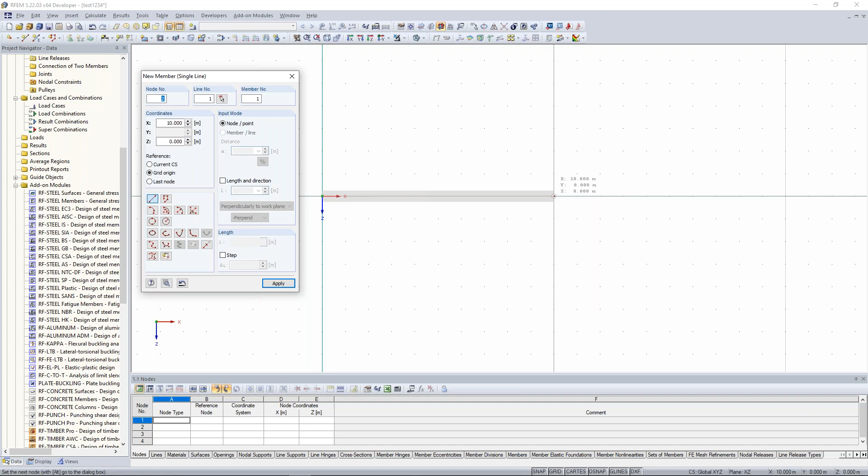Okay, someone is asking if we can show a reinforced concrete beam. Yeah, of course. I'll make a test example here. When you want to do calculations with reinforced concrete, you have to use one of our add-on modules. So first of all, create the beam, choose a rectangular beam here, put in maybe some coordinates, something like that. Choose also the right material, this is important. And then create your beam, 10 meters long. Then I need some supports, of course, I put here 2 supports. And then also the loads. Sorry for taking some time maybe.

Yeah, good. And now you can calculate it. You get your internal forces.

And then use the add-on module RF Concrete Members. When I open this add-on module, you can preset your ultimate limit state, so what you want to design and according to which standard. Then also the materials, here you can change some settings. Cross sections, supports, I think that's clear. And then here you can consider your reinforcements. So what do you want to use as rebars? Which diameter should they have? And a lot of other stuff.

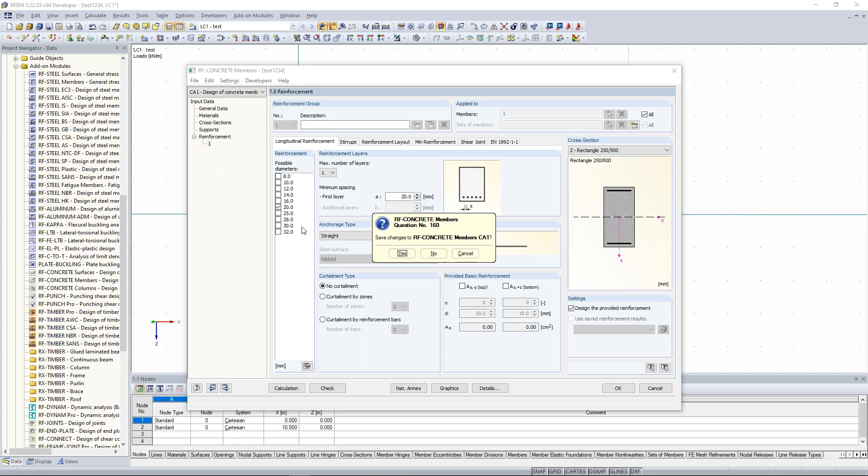It would take a lot of time to do now a single design of a single beam. But with the help of the add-on module RF Concrete Members, you can calculate these beams here.

Okay, next question. Please throw some light on geometric and material linearity, someone says. Can I see the question? Which time? 12:02. Five minutes ago, material linearity.

Okay, I understand. As I said before, we calculated these systems first with the different linearities, so the method of analysis. We have the geometrical linear analysis and also the second order analysis. The geometrical linear analysis makes the equilibrium of the whole structure at an undeformed system. And the second order analysis, or the P-Delta method, calculates the forces and internal results at a deformed structure. This was also the point where I showed you the additional bending moment.

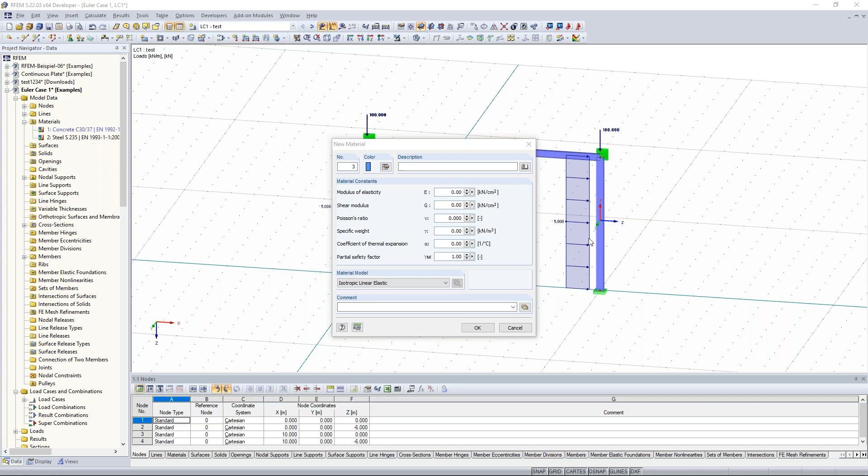When you want to consider different material linearities, just go to the data navigator, go to materials, create maybe a new material. Here at the material model, you can consider almost every nonlinear material, whatever you want. You find it also in our handbook, and you can also download from GoToWebinar one of our PDFs. There should be the RFEM training manual. I would recommend you download it from GoToWebinar, but you will also get it by email, no problem.

Okay, Praxitelis, any new questions? We got many questions that are not that relevant to this training. Do you want to answer all of them? For example, foundation analysis or seismic loads. Yeah, these are questions not really referring to this training. I would rather answer the questions which rely more on the general part of RFEM. But horizontal loads, what do we do with?

Maybe you pick up some questions which rely more on that basic training, but we will answer you later. Maybe one more point, I can really recommend you to visit our website. And here, when I change the language to English, on our website you find almost everything. I mean with everything, I mean really everything. So when you have any problems or any questions, don't hesitate to ask us.

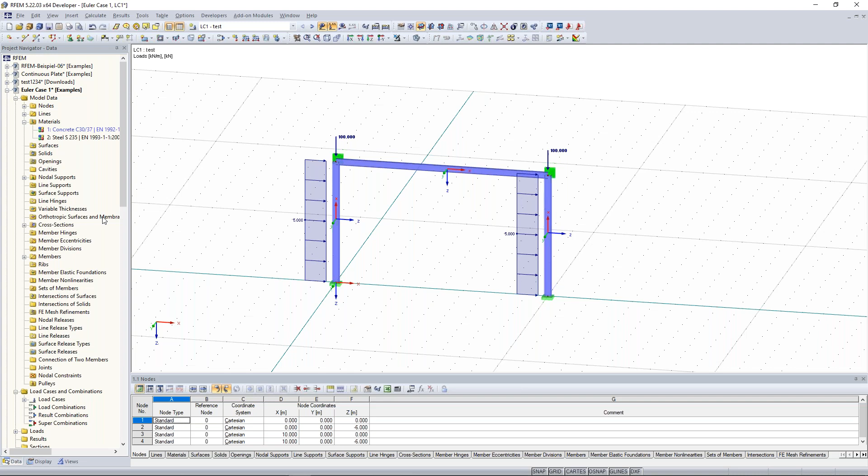Here you can identify identical nodes or overlapping members and so on. And for those who ask about errors concerning the critical load factors, with the help of RF Stability you can calculate the different buckling cases, and then you will also see where the problem of your structure is.

I also have a very good FAQ concerning unstable systems. I have to look it up. Wait a moment, I have it here. And I will post it to the chat.

So if someone gets the error 'my model is unstable,' what could be the reason? I would recommend this article, this FAQ, I created. There are different checks to do. First of all, you have to check your model with the different options of model checking. Then also check the stiffening. There can also be some numerical problems. How can I detect these causes of instability? I can do it here. I can recommend you this article.